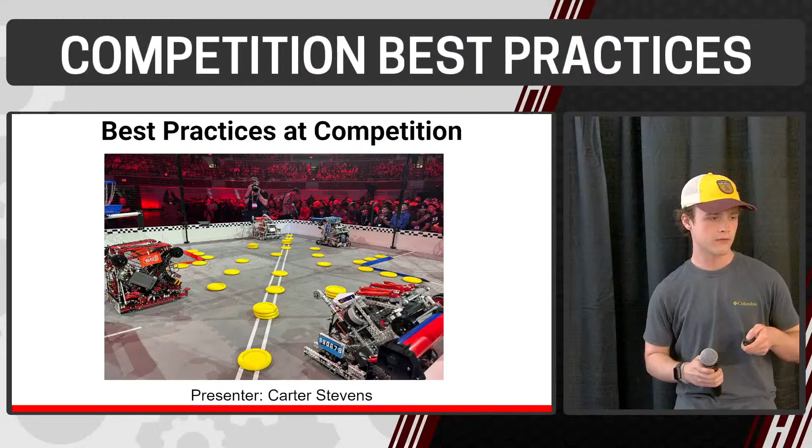Overall, how you should act at competitions, what you need to do, and just stuff like that. So let's go ahead and get into it.

So who am I? My name is Carter Stevens. I'm a former Vex competitor. I just graduated this year after Spin Up. I was on team 99067B from Change Up, which was the game in 2021, to Spin Up, which just ended this season. So some accomplishments I did in my Vex career.

We won our division at Worlds this year, which was pretty cool. It was nice to win a division finally, after unfortunately losing in round of 16 in Tipping Point, but that's besides the point. And then we won states 2 years in a row for Arizona, Tipping Point and Spin Up.

And I'm a freshman at Arizona State University, currently majoring in mechanical engineering, though I think aerospace is calling my name. Gonna switch soon, we'll see how that goes. And I pop back and forth in competitions, I help out, volunteer, and maybe this season you'll see me doing some judging stuff. But that's who I am.

So let's go ahead and start the competition best practices. Before we start, we're going to look at the agenda for this slideshow. We're going to talk about before the event, how you should act, what you need before the event, because it's crucial to ensure success at competitions. During the event, how you should approach certain teams, ask them about the robots, do some scouting, manage your time, match strategy. Then after the event, how you should try to network with other teams, get their Discord, and share resources to improve for future competitions, scouting, data collection, and using data for your pick list. And then we'll also be talking about some driving tips. So let's go ahead and start.

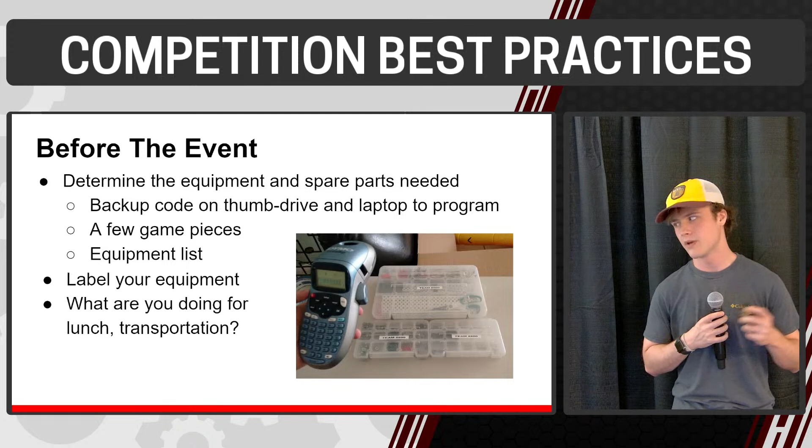And then lastly, another really important thing that I think a lot of teams undermine is lunch. You need to be properly energized during these competitions, or else you'll feel horrible. I remember the first competition for Spin Up at Mountain Point, I didn't eat anything the entire day. So when the elimination matches started, I was super fatigued, super tired, and we ended up losing because I just wasn't at my best performance. So you always need to make sure you know what you're doing for lunch and transportation there and back. Super important for competitions, it's something a lot of teams look over.

And also, you need to come up with hypothetical scenarios prior to the event of what you want to do or what could potentially go wrong. So for example, if you want to be ready for the worst, essentially, if your autonomouses don't work, you want to understand why you didn't achieve your goals at the event. So let's say you have a goal of ensuring that the autonomouses that you've coded work properly. You want to understand potentially why those autonomouses might not have worked at the competition, just so you aren't disappointed and wondering what's happening.

And you kind of want to minimize these errors at competitions because you don't want these autonomouses to not work, and then you're at the competition saying how could we have prevented this, because sometimes fields vary and stuff like that. So I guess at competitions you should really expect the worst, which sounds super bad, but if you expect the worst, you can kind of minimize error in that sense.

So now we're going to look at pits.

At most competitions, it's generally just a really small table that you can put all your stuff on. Make sure you have your essential parts there for maintenance and repairs. After matches, let's say a C channel gets bent on the back of your robot, you can easily find your stuff, which also goes back to labeling your parts, because if none of the parts are labeled, you won't know what's what, and you waste time potentially missing another match. Always have one dedicated person as the pit boss on your team.

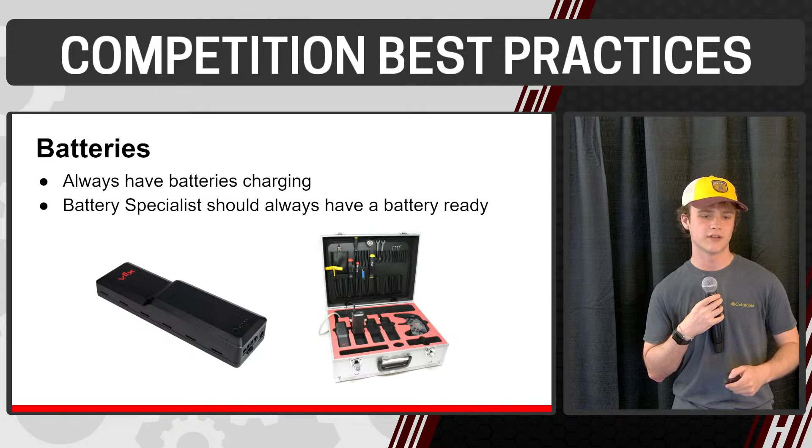Tournament roles. There's a lot of people on the team, so you always want to dish out your roles according to what they would like to do. So there's a mechanic, someone who's repairing the robot and builds it - make sure that if something goes wrong mechanically, you can fix that at the competition to make sure stuff works. The programmer, a scout, a strategist, a battery specialist, the person who carries the battery back and forth.

The pit boss, someone who's always at the pit. The driver, drive coach. So even though these are 8 roles, a lot of people will often have 2 or 3 of the roles. For example, the scout and the strategist will probably be the same person, and the driver needs someone to help them because sometimes you get so tunnel vision when driving, so you need someone to say 'hey, you need to do this' because you're not focusing on other people on the playing field. The pit boss and the battery specialist also might be the same person. So keep in mind, you don't need 8 people on the team to carry out each role - rather, people on the team will have multiple roles.

Okay, so now let's talk about before the match. Some tips: before every match, you should always talk to your alliance partner. You need to figure out who they are, what their robot is capable of, what their autonomous is, and see if they are capable of scoring or should be primarily a defensive robot. This is super important because if you design your robot for defense and your alliance partner is also a defensive robot, you don't want to go into the strategy of 'we'll both play defense,' because you'll just lose.

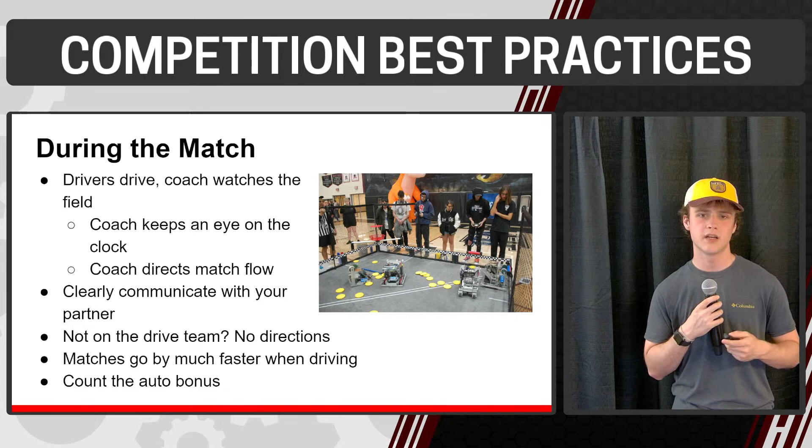Always make sure you know if you won auto, because this is super important. I know it happened at States this year in the finals match where a team looked like they'd won, but because of the autonomous period, especially in the spin up game, that 10 points makes a huge difference. So if you win the autonomous period, keep that in the back of your mind, even if it looks like you didn't win the match, because you never know.

After the match, make sure you yourself consciously look at the field and be like, okay, we scored X amount of points, we have this many discs in the high goal and such and such. Always confirm the score with the scorekeeper because sometimes as humans, we all mess up.

We all make little mistakes, so just keep in mind that the scorekeepers might mess up the score. Don't yell at them or anything, just confirm the score after you check it.

If there is a potential rule violation, have one person on the drive team go up to the head ref. Don't send the entire team. I'm sure it's super annoying for them to have 5 people come up and say, 'they did this, they did this, they did that.' Just have one person go up. It makes their life a whole lot easier, and it's just being a good person.

After the field is reset, the scores are final. Once that's done, it's done. You can't go back up to the head ref and say, 'wait, you didn't do this.' You should have told them before. The score is final.

I know in spin up this was a huge problem, but be ready to untangle your robot. Last year, all the string shooting was just total chaos. But even in other games, sometimes your robot might get wedged under a drivetrain or an intake. So be careful to make sure nothing breaks, and be ready to take another person's robot off yours if it's entangled by accident.

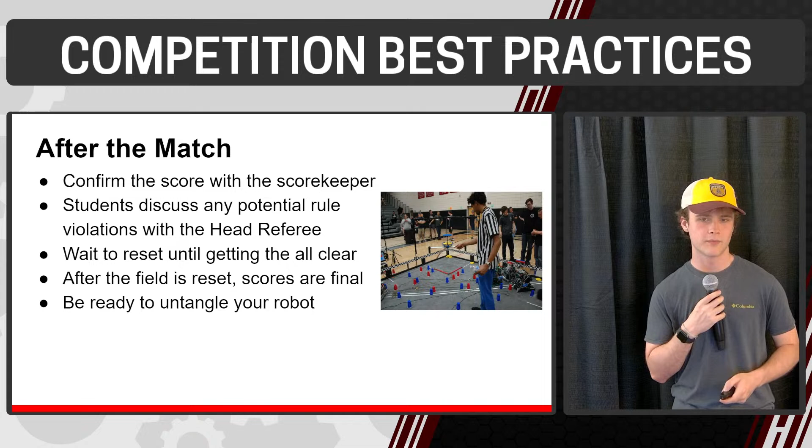Skills is super important. Don't make the mistake of waiting for the last 10 minutes of the competition to do your skills runs. Skills runs can qualify you for the state championship or even the world championship, depending on your score. Get your runs in early, don't do the thing of waiting. It's bad, you'll only get one in, and then you're gonna get yelled at. It's not fun.

Get your safe points first. If you know you have a high autonomous routine and you have a chance of potentially winning skills, make sure you run it first. Get those points in just in case, because other people's autonomous runs for skills might not work, or their driver skills might not be as good that day, and you could win skills just because you got it in early.

And if you do plan on doing a skills stop time, make sure you inform the scorekeeper or referee. Be like, hey, we're gonna plan on stopping at 10 seconds, just so they know. Don't be like, wait, stop mid run.

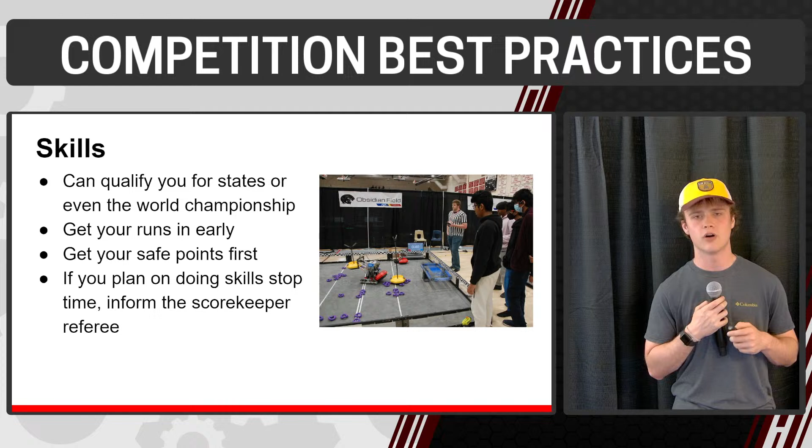It just makes their life a whole lot easier, so make sure you do skills. It's super important. I know there were some teams who didn't do skills. You can qualify for worlds from it, like if there's double qualification, so doing skills is a good backup just in case.

So scouting. This is super important at competitions, and even before competitions you can do this. Looking at a team's past competition results, seeing how many points they score and so forth, is a huge advantage, especially when it comes to alliance selection and match strategy. If you know what a team is capable of prior to actually talking to them, you have a better sense of how the match will play out, giving you a more direct line of strategy.

You can also walk around the pits, which is called pit scouting, to look at robots. Be like, okay, this robot looks pretty offensively capable, or this robot looks like it can do defense. Then there's match scouting, where we look at the team's points, OPR, DPR, contribution to winning matches, autonomous win points. That can be used to collect data on that robot's specific performance.

A smaller team means less rigorous scouting, because you just have to go up to one person and be like, hey, what does this robot do?

Another good resource for scouting is networking. If you know good teams prior to going to a competition, just because they're so well known, it gives you an upper hand of what to expect. You're not going to be totally shocked when there's one team who's just destroying everyone. So do pre-match scouting: look at the team list, see who you're going to face, and check how well they've done at previous competitions.

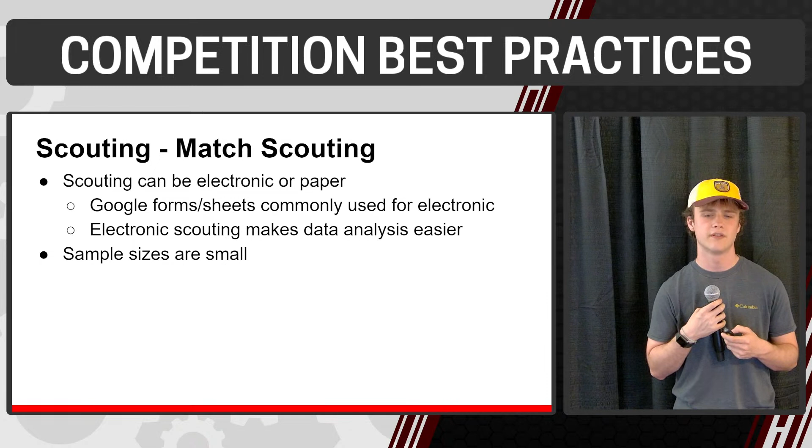But be aware that the sample sizes are small. Even if a team's looking good for 2 matches, that might not be the case for the rest of the tournament. Always be aware of what you're trying to accomplish, ask the team, and if you want to potentially alliance with them, watch all their matches, because it might be a fluke if they're only doing good for 2 games.

The scouting system is often created by the team strategist or scouter. Normally when you do pit scouting, we would have one or two people walk around the pits and ask teams about their robots, like hey, what does this do? Are you guys good at offense? What autonomous routines do you have? Can you guys play defense?

There should be one person always asking your alliance partners before every match, what can it do? Do you have an autonomous? What does your autonomous do? Can you get the autonomous win point? Stuff like that. But be sure to swap out your strategist and have other people do it, because it's good for that person to get a little break from scouting.

If you don't have that many people on your team, reduce the amount of teams you scout. Maybe make a list of teams who might be scary at the competition, seem really good, go up to them and talk to them about what their robot does, just to gather that crucial information on the teams who look good and could potentially win the tournament.

Data for match planning. The strategist should always give the data to the drive team, because that information will be crucial for the drive coach to look over, like this robot plays defense, this one's good at offense. It's really good for the scouter and the drive coach to have really good communication with each other.

In case you're like, who's this team? The drive coach might not know, and the strategist can say, oh, they can do this, they can score that many points, or they have this autonomous. It's really nice to know who you're going up against in detail before you're actually playing against them.

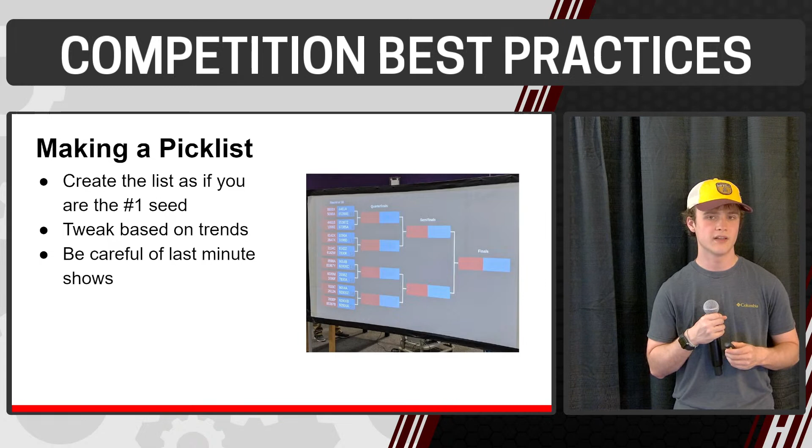You can always make a good case, like saying, hey, you're super good at offense, or we can play defense while you play offense. They might say, okay sure, we have seen you around, you are pretty good at defense, that would work.

Be sure to be super cautious when declining at competitions. Only decline if you know you can do better. Let's say, for example, you're the 5th seed and the 2nd seed picks you, but they're not that good, they're a push bot. They say, hey, we want to invite you. You should only decline if you know that the seeds from 6 on are significantly better than that 2nd seed.

You should only decline a pick if you know you can do better than what you're getting picked by, and you should take riskier picks if you know you're outgunned. So let's say you're the 16th seed and you're going to have to play against the 1st seed regardless. You need to pick a team that might have that inconsistency, like one match they're scoring all the points possible, but in other matches they're not doing that good. You might want to take that pick if you know you're really outgunned by a 1st seed, because that team might have a super good match and then you guys just beat the 1st seed because of that one really good match from the streaky team.

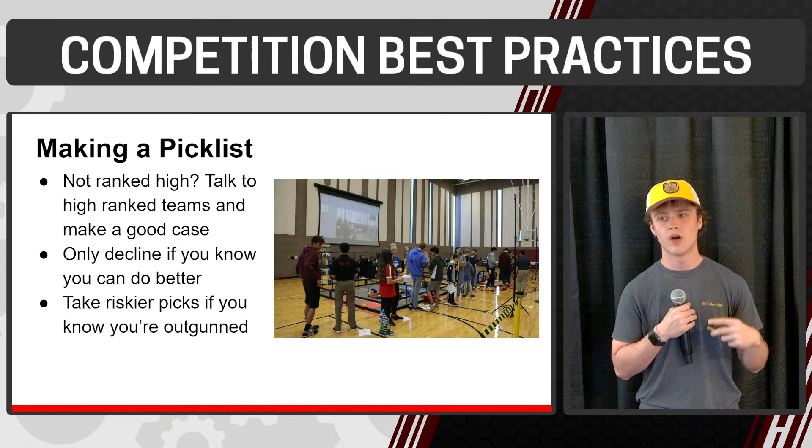For the 1st seeded alliance, Team A picked Team F. Team A has a true skill of 7 out of 10, while Team F has a true skill of 9 out of 10. So that alliance combined together has a true skill of 16 out of 20.

Let's see what else happens for this alliance selection. The 2nd seeded alliance has a true skill of 17 out of 20. So they're already better than that first seed just based off of Team B's pick of the 7th seed, which was probably the sleeper pick at this competition, and they probably got overlooked by the first seed just because of their seeding.

Then we have the third seeded alliance. This third seed didn't really make the best decision that they could have. They could have picked another team that was equally or just a little bit better than Team E, but that's okay.

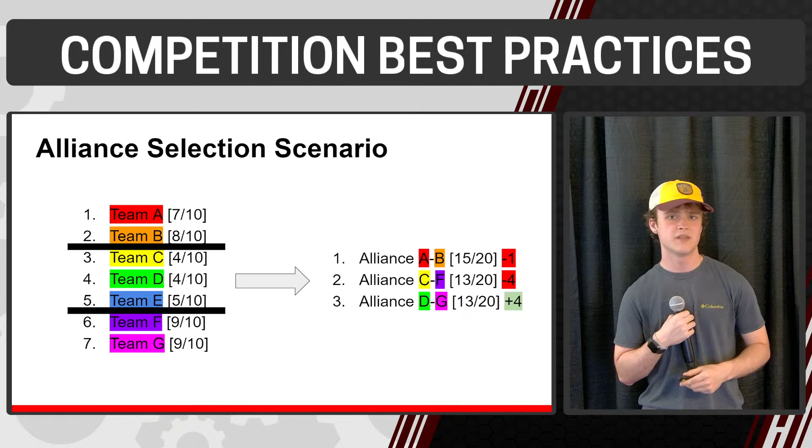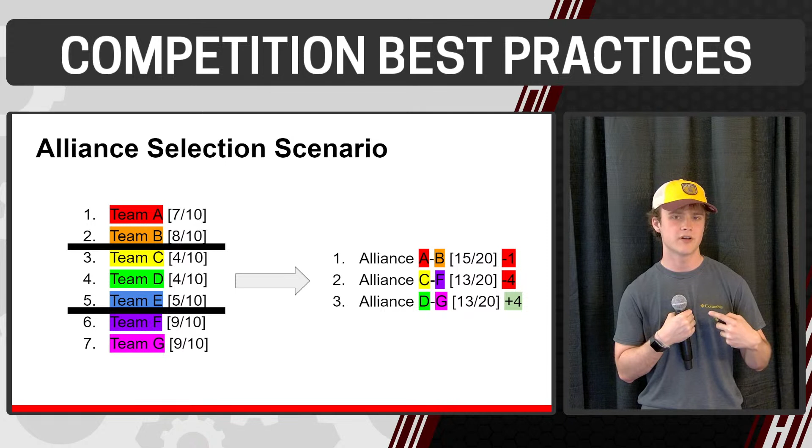When you're making a pick list, a team's performance cannot be easily summarized by one rating. You shouldn't just look at the OPR of a team, because it might not be that good at offense, but then on defense they're just insane and can shut down anyone.

There are also so many factors that one must balance during alliance selection. If the first seed picks a team, you need to understand that you can't pick them anymore, and so on. So having a list of teams that you want to pick as if you were the first seed is super important for alliance selection, because you never know what they're thinking and what could happen.

Always keep those factors in mind when you're going through alliance selection, and know that a team's performance can't really be based off of one rating. You have to take into account everything, their match schedule, how they've performed at previous competitions, and stuff like that. Because a really good team might have an impossible match schedule, but they're like the best team at the competition. Don't assume they're not good—they just had a really hard match schedule, causing them to lose a bunch of matches. Just be sure that a team's true skill isn't summarized by one specific rating.

So now the competition's done. Things went pretty well for your team. You're always going to want to reflect on what went right, what went wrong, what can we improve for future competitions. The engineering design process just starts over, and you have to reflect on what you did to improve for next time. Keep that in mind after competitions. Don't just be like, oh, we did terrible, we can't improve. You can always improve, especially if you break down what happened specifically, what went wrong in the matches you lost and what went right in the matches you did win.

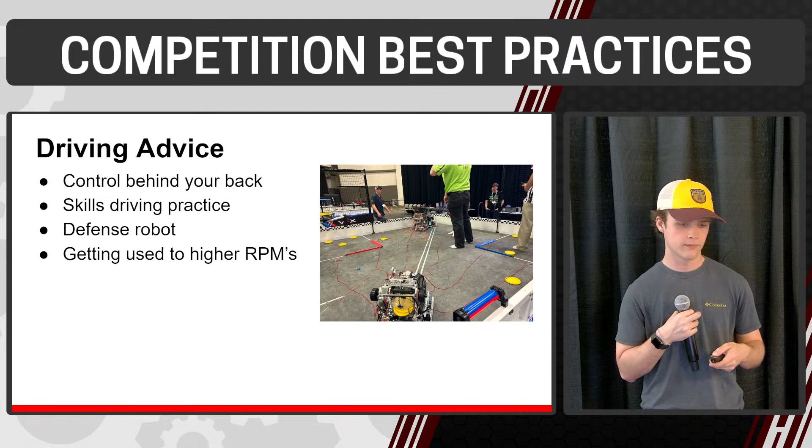So some other tournament advice: be flexible with the events, because sometimes you might get to a competition and fields might not be built, or the head ref isn't there, or stuff like that. Just be flexible. Understand that not all competitions are set up perfectly or run the same way. Just be understanding of school situations with fields and such.

Be sure to have fun. This is the best part about Vex. You should always try to have fun with competitions, even if you're losing. Make the best of a situation. It's hard, I know losing sucks, but you can always look at the positives and be like, how can we improve from here to get to the next level to where we aren't losing anymore and we're actually winning.

Another thing that's really fun is networking with other teams, because once you get to talk to those teams and become friends with them, they might share stuff with you. There's a lot of Discord groups, but be careful with some of them. You get involved in Discord communities, you can talk to teams on Discord and stuff like that.

Make sure you stay hydrated and stay fed. Don't do what happened to me at the first competition where you're super fatigued and tired. Drink a lot of water because you're doing a lot of walking back and forth and you need energy. Make sure you eat food and have a team brand. Go to a competition, if you're like the Jesters, wear fun outfits related to that. Have fun at competitions, basically.

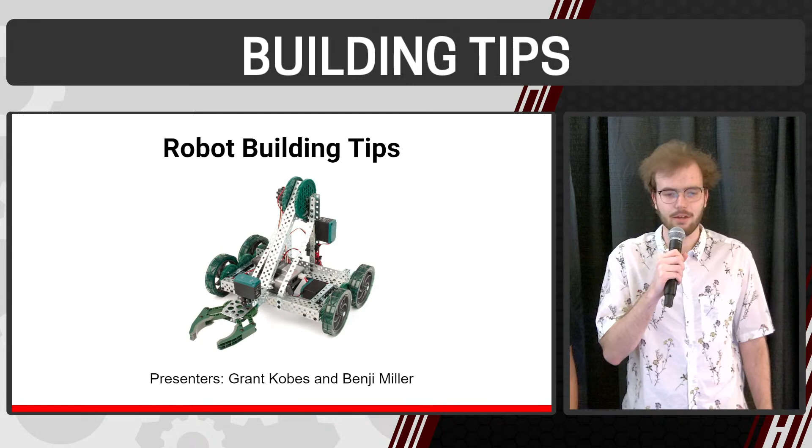So right now we're going to be going into our robot building tips, so you can build a robot that is as fine as the one you see on your screen right there, the original Vex Clawbot. I'm one of your presenters, Benji Miller, along with Grant Kobes.

So who am I? My name is Grant. I've been in Vex for 8 years as a competitor, and now this is actually my 10th year, 2 years as a mentor. I did 3 years on Team 8926 in South Carolina, and we won state all 3 years. Then I started a Vex U team, YNOT, at the University of Tennessee in Knoxville. In our final year, when I was team captain, we won both Worlds and the tournament championship, which was pretty cool. Now I'm a mentor for the YNOT Alliance organization, which is an organization of multiple different teams from all over the U.S. competing to hopefully win Worlds again.

And who am I? I'm the guy posing with that big stuffed shark right there. I'm Benji Miller. I did 4 years of VRC with Team 127, and I won 2 Arizona VRC state championships as tournament champion. My senior year, my team got third in our division at Worlds in 2018. Now I do a number of things like this workshop — I MC, referee, judge, coach a team — and I have a master's degree in mechanical engineering, so that's how I'm currently employed.

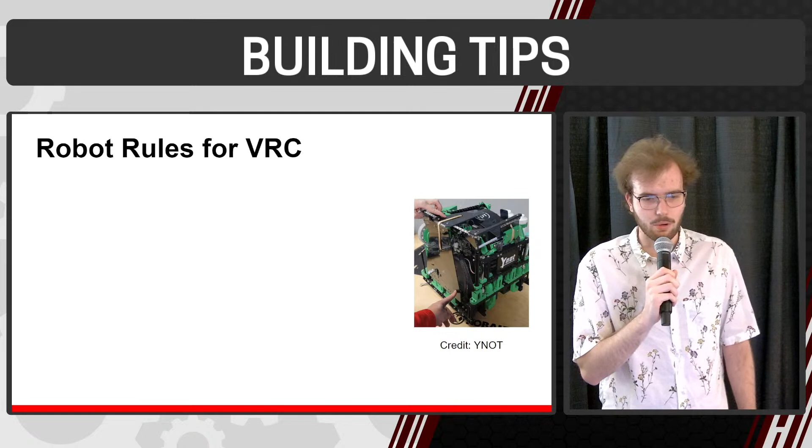So, Grant, you want to start with the robot rules for VRC? Yeah, let's get into rules.

First rule: you have to use V5 components. It's really the only option. There are a few other little things you can use, but you pretty much have to use stuff, especially electronics, that are V5. There's a size restriction in Vex — you have an 18 by 18 by 18 inch cube that you're allowed to use, and you have to start in that size. There is some expansion allowed in this game in pretty much every orientation, which is cool. Some years that's not allowed, but you have to start within that size restriction.

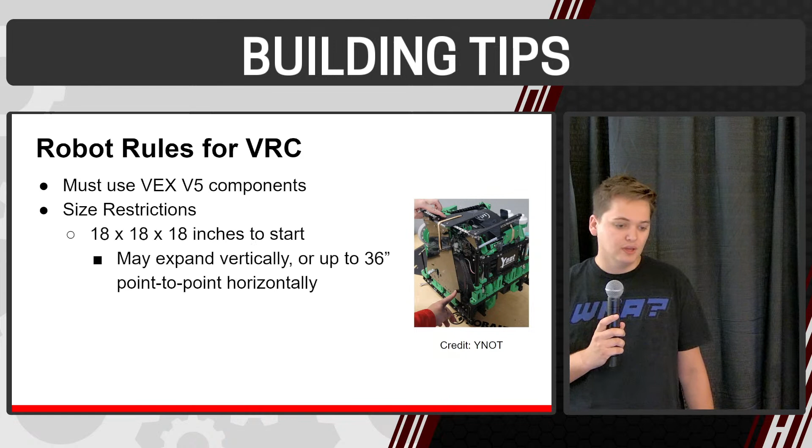Mechanisms can expand vertically. You have to use the V5 electronic system, which is the brain, up to 8 11-watt motors. This year we're getting into 5.5 watt motors, which are new — those only come in, I believe, 200 RPM, so they're a little different than the regular motors. We're now limited to an 88-watt system instead of the 8 by 11-watt motor system. You have to use a battery and a radio, and they all have to be purchased off the Vex website.

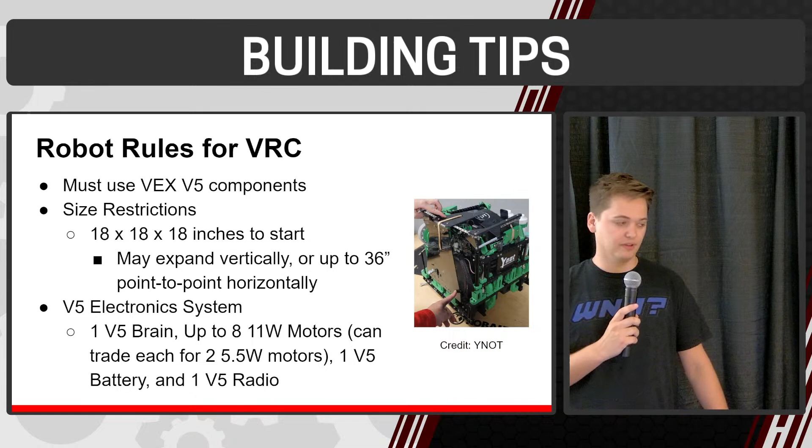18 by 18 — I wonder where I've heard that one before. So we're going to start off with the rules for pneumatics. We have a couple slides on this. This one is showing the old pneumatic system. They did recently release a new pneumatic system, so we'll get into that as well. But first of all, you're allowed up to 2 total pneumatic reservoirs, otherwise known as air tanks.

You're allowed 100 psi of pressure, so please don't try to break that rule, because with the new air gauge on the V5 system, if you're using that, you'll probably get caught right away. You're allowed as many cylinders as you want, but they must match the Vex part number. On the next slide, we'll get into the new pneumatic parts that show the different cylinders you can use. There's no motor penalty for using pneumatics, so if you can get your hands on them, as Grant might say, why not?

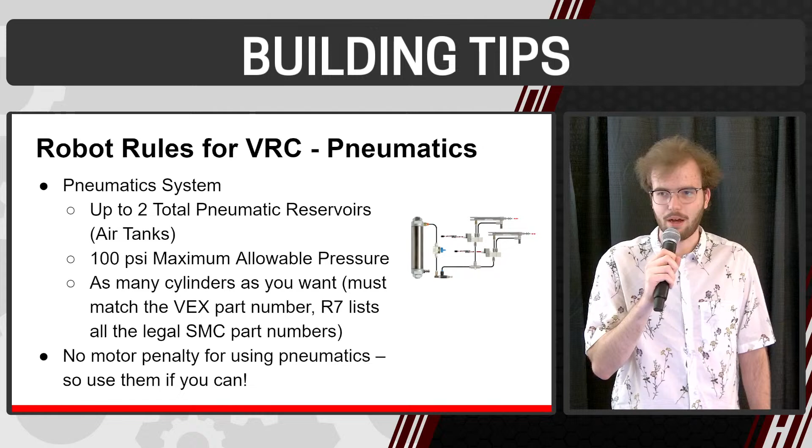So we're going to get into the pneumatics — very punny. They should be interchangeable with the old pneumatic system. Air is air, you see I have that nice O-ring there, because we're using the same diameter. We also have different stroke lengths of cylinders, so you might be thinking, what's the difference? First of all, obviously if it's smaller you can fit it more easily somewhere, but that's not the only difference — the total stroke distance is going to be a little bit different. Whereas before, if you wanted a shorter stroke you might just stop it earlier, now you can use a smaller cylinder and fit that in where you want.

Instead of messing with the stroke length and the effective motion you can get out of it with a gear ratio or some leverage, you can actually just use different cylinders. And of course, if you use a smaller cylinder, it's going to use less air. So if you don't need that full stroke, you can probably just get away with using that smaller cylinder. And like we mentioned, the PSI is limited, so you're going to run out of that a little slower.

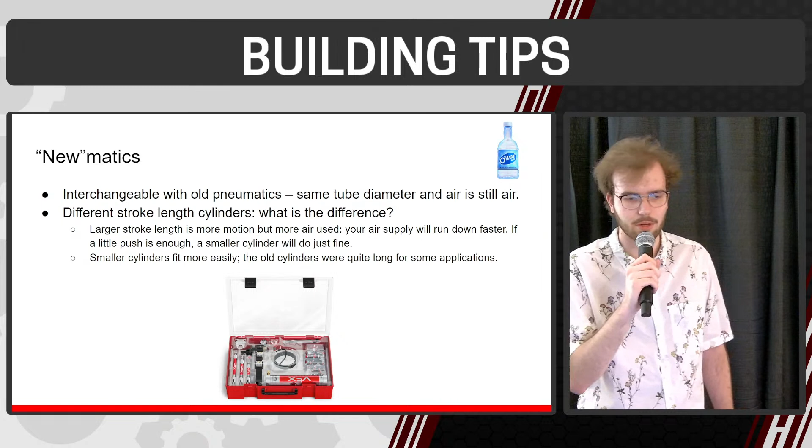Another fun rule you get to do is we get plastic. Plastic is any non-shatterable plastic, can be used to make different components of your robot. This allows for a lot more creativity in Vex, as the normal Vex system is designed off of these little half increment metal pieces. But instead, now with this, you can do a lot more custom stuff for your robot. However, you are limited to a single sheet of a 12 by 24 inch, which is about a 1/16 of an inch thick sheet. Doesn't matter what color it is. It can be like a tinted color, it can be clear, it doesn't really matter, as long as it's a non-shattering plastic. The rulebook actually specifies the types of plastic, but it's pretty much non-shattering. As you can see in these images, you can do a lot of cool stuff for this.

So you can make these little hooks that this team once did for the tower takeover year. We have a ball launcher on a catapult for—

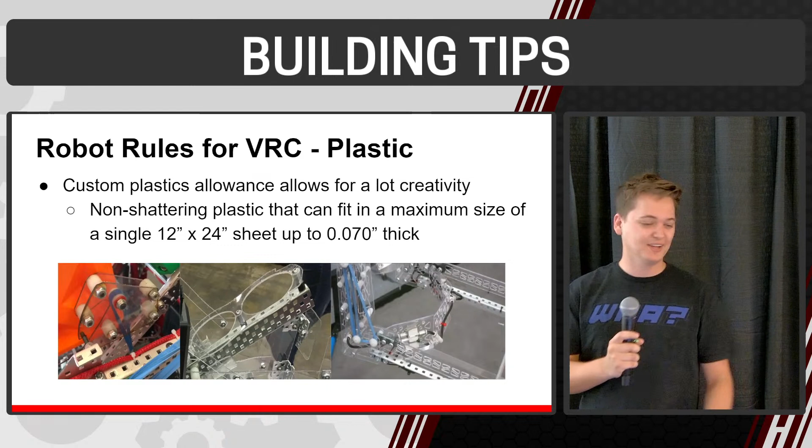What year was it? I don't know, I can't bail you out there, but you could use it this year. Yeah, you could use it this year. That was the flag year—I just can't remember what it's called. Turning point. Turning point, yes, there's turning point, lots of keywords and then points—turning point and tipping point as well. Turning point and tipping point. Did they go back to back on that? No, there was like a year of gap—separation. But then, still...

So another thing with this other picture is actually creating an entire structure piece for a reversible 4-bar, and then the actual single bar, all out of plastic, which was really cool. That was from Team 6007X, which I think now runs a really cool company.

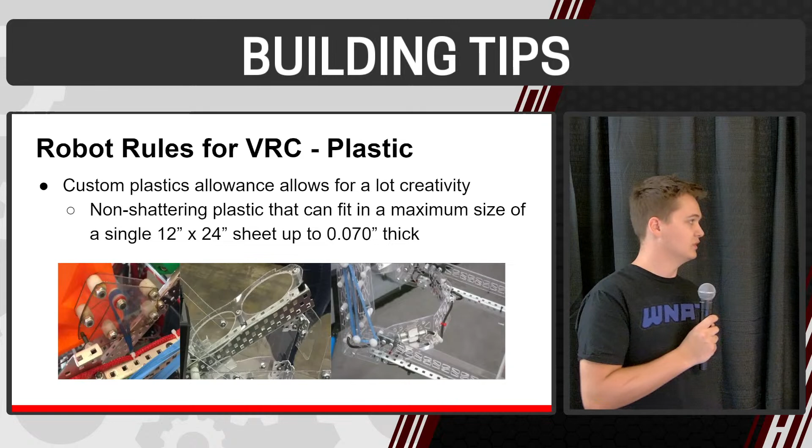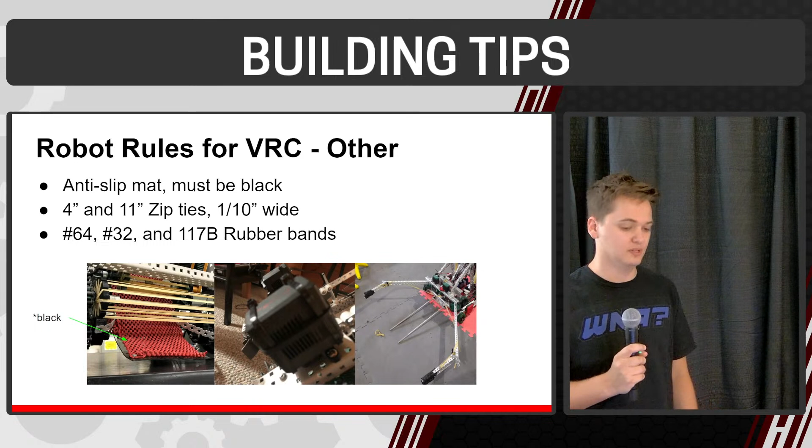Pretty smart people. So other robot rules that you get to do: you can use anti-slip mat. The Vex website has this, but you can use other types of anti-slip mat, that's okay. In this picture it's red, but it has now been specified that you have to use black. That didn't used to be written that way. You can use 4-inch and 11-inch zip ties. The width does matter, that's important—you can get called out on that. And then the only types of rubber bands you are legally allowed to use are 64, 32, and 117B rubber bands. I personally prefer 64s over everything else, but I know the new 117Bs that Vex sells are actually quite nice and pretty elastic.

All right, so we're going to talk about gear ratios and sprocket ratios. It works on a similar concept. So just to clarify, a gear is what you see on that screen here where you have the interlocking teeth. Don't try to do that with a sprocket, it's not going to work very well for you. So the sprocket, you're going to want to use that with chain.

So what's the difference between gears and sprockets? Well, first of all, the gear, obviously, has to be right up next to each other versus chain and sprocket—you can transfer that power over a longer distance. And then also with the chain and sprocket, both the driving and the driven end will be going in the same direction, versus the gears where they're going to be going in opposite directions.

But then the principle of ratio is going to work out the same. So you see on that top left image, you see motor and then moving part, or you could also look at that as driving and driven. So there's a 60-tooth gear there that's driving with that motor, and a 36-tooth gear that is driven. So for gear ratio, we're using this convention where it's driven over driving, 36 teeth over 60 teeth—it's a 3 to 5 gear ratio. What does that mean? That means this driven gear is actually going to do 5 revolutions for every 3 revolutions that this driving gear is going to do with that motor.

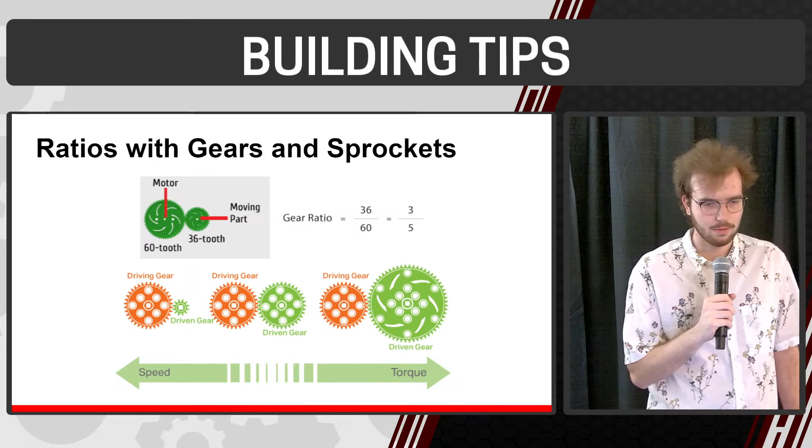All right, so we're going into structure. We're going to recommend that you use primarily aluminum, we'll say 99%. If you notice there's one small piece and there's no way you can really brace it better, and this one just keeps bending a little bit, okay, maybe you want to use steel there. I'm talking about, say you have a lifting arm to lift yourself up for the elevation in this game, and there's just one really critical piece, maybe that'll be steel. But if you're having robots ram into you and your robot is bending inward, maybe try to brace that another way as opposed to just saying we're going to make our whole drive base steel, because that's going to slow you down a lot.

So again, if you're looking to start a team and you're ordering parts right now, I would say stay away from the steel. Just order all aluminum. Obviously, it's a little more expensive, so there's cost benefit, but for the purpose of being as competitive as possible, aluminum's your way to go.

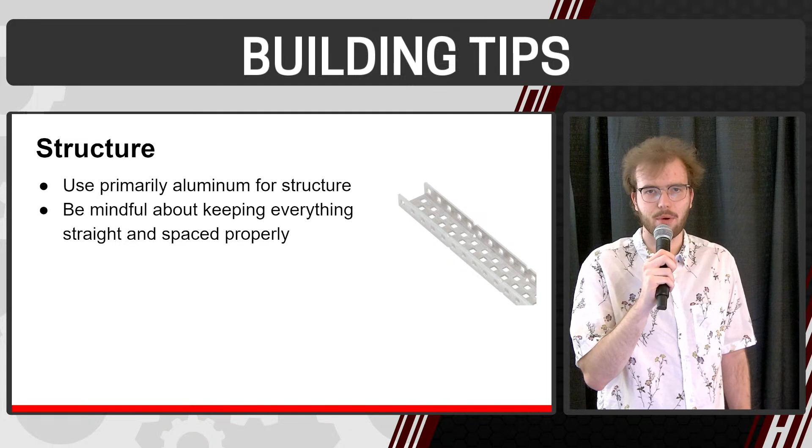And then make sure you're keeping everything straight and making sure you're keeping it spaced properly. Because if things aren't aligning, say your drive isn't lining up, that is going to cause you a lot of issues with your drive burning out, making things not free spin as easily. Make sure you can free spin your wheels and your drive when the motor isn't attached. They should free spin easily, that kind of thing.

And you notice there are square holes, and you're putting a round peg in a square hole, right? And there is a little bit of tolerance, a little bit of wiggle room, because you're relying on essentially your bolts to be tightened enough to have what we call in the industry preload on those fasteners. It basically sandwiches two pieces of metal together when you're putting a bolt between them. And if that preload is overcome, everything's going to shift slightly, until it reaches the point where it's putting what we call shear stress on the bolt. Basically, one part of the metal is pushing the bolt one way, one part's pushing it the other, and then unless the nut comes off the bolt or something like that, that's going to limit how far it can go.

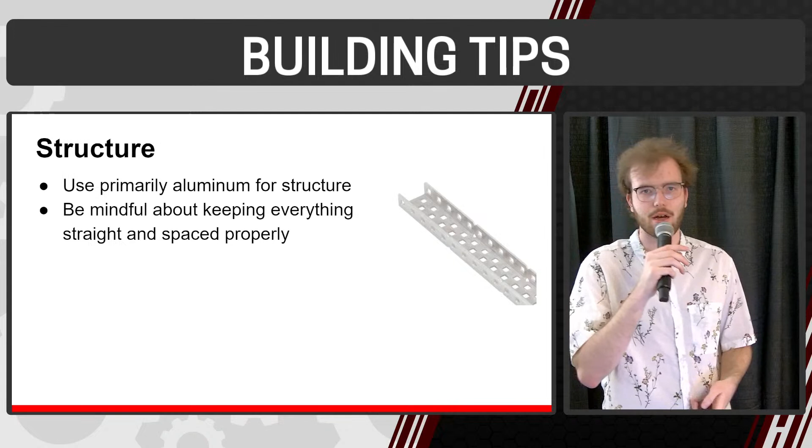By that point, it'll already be a little bit misaligned. So just bear that in mind, and try to have mounting points or multiple connection points between two pieces of metal or two overall substructures as far away as possible. Because if you move a fraction of an inch over here versus moving a fraction of an inch relative to each other right here, that's going to be a lot more change in angle when they're close together. So try to space out your structural joints.

And then, like I mentioned, Vex metal square holes create slop. And then a small low torque hand drill is going to speed up your assembly process. That'll allow you to iterate your robot design a lot more quickly. So if you're able to afford that, make sure that you consider that.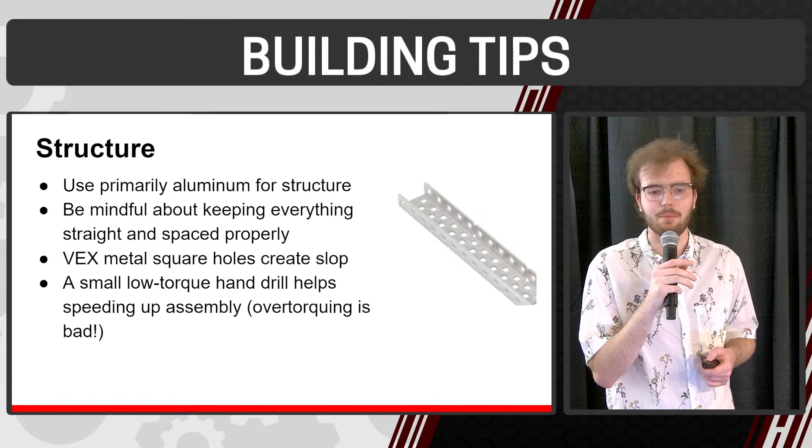But don't over torque it. You want to limit your torque when you do that, so you don't strip the head of the bolt, because that is very, very, very unpleasant. I think most teams that have been in robotics for a while have been there, and sometimes you're like, man, can I just cut my robot in half because I just need to get this bolt off?

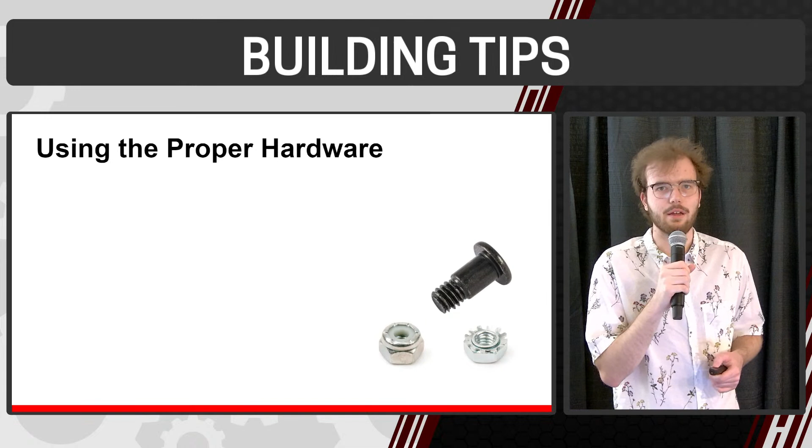And then we'll speak to using the proper hardware, talking about nuts and bolts. You see that black bolt on the top and then two nuts right there. Nylock or Kep's nut? It's an age-old question in Vex. So we're going to recommend that you use Kep's nuts sparingly, and we're going to use them in combination with Nylocks.

There's a bit of a tendency with Vex teams that they say, oh, you know what, we'll just use Kep's nuts, we'll put on Nylocks later. And later comes and you haven't done it yet, and part of your robot falls off in the middle of the match. So if you think you're gonna maybe be using that part later, I would just tighten it down with a Nylock. But definitely, if it's gonna be your competition robot, I would say all Nylocks. Kep's nut is only like, oh, I'm gonna throw this thing on real quick just to test it, and this isn't gonna be the final form or anything like that.

But overall, we're just like with aluminum and steel, Nylock is the aluminum of this debate. And then, here, let's go back for a little bit.

Okay, another thing about bolts is, if you're gonna use Nylock, please make sure that the bolt is actually long enough to get into the nylon portion of the nut. I've seen this actually quite frequently, where teams will use a bolt that's too short or sometimes even too long. Too long is not a huge problem, other than it may stop you from building in other areas later down the line, and then you'll have to replace it with a shorter bolt.

So just always try to measure what size bolt you actually need, as Vex makes tons of different types of bolts, and there's tons of different options. And you don't want to be putting extra weight on your robot that you don't need, but you also don't want to be putting a bolt on there that's not gonna do anything when it gets to the actual locking portion of the nut, and then your robot just falls apart. So be very careful about your bolt lengths.

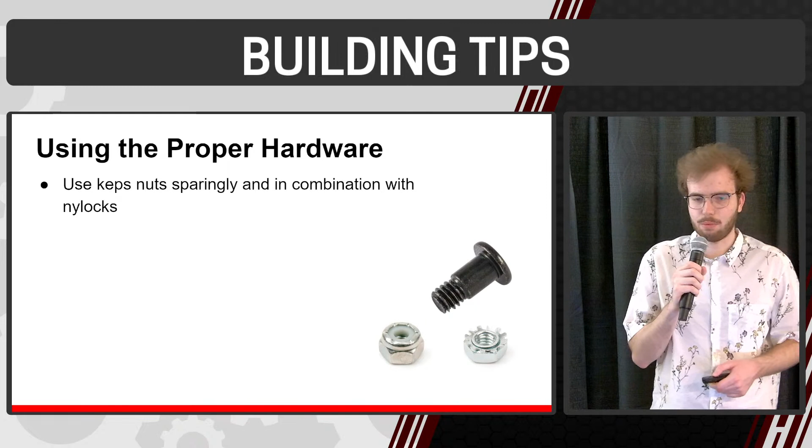Yeah, exactly. So you see in that picture of the Nylock right there, you can see the white nylon portion at the top, and that's what Grant's talking about. So make sure the bolt gets to there because that's what provides your locking feature. All right, great point, Grant.

And then I'll hand it over to Grant for our section on motion. All right, so we got a lot to talk about in motion, but just to get started, so drive shafts, they're these little square shafts that you're going to have that fit into almost all the Vex products pretty nicely, honestly. But there's two types. There's the regular drive shaft, which is now called low strength, and there's the high strength. The high strength ones are pretty beefy. They're quite strong, but they're not very easy to use on most of the robot.

You normally have to actually drill a hole in your C channels in order to use them, which is kind of a pain in the butt. But in some cases, you do need them. But most of the time, you're going to be using a regular drive shaft or a low strength drive shaft. And these drive shafts are all going to need bearings.

If you're a new team, please use bearings. If your robot is making clicking noises or crunching sounds, check your bearings. Bearings are very important to motion, as a square hole does not make a good turny thing.

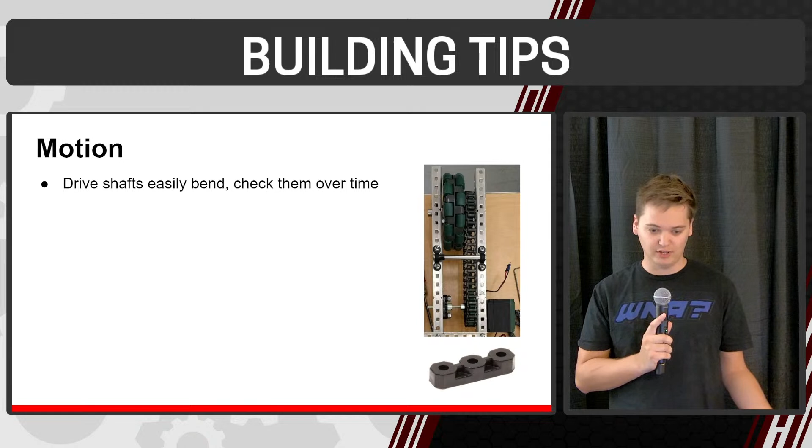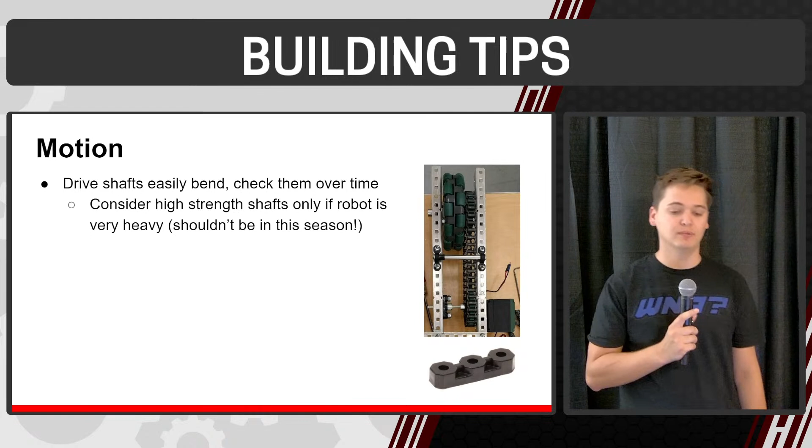You need a round hole to make a good turn. High strength shafts aren't a huge deal this season. They can make stuff more robust, but honestly they can be used better in actual structural ways than in rotary ways. Check for friction.

What I like to do when I put my robot together is spin all the wheels freely without the motors connected, to see if one spins for 6 seconds and another spins for only 2 seconds. The one that spins for 2 seconds might have unnecessary friction that isn't good for the robot. We want all our drive shafts spinning the same way, so when we put the robot on the ground and make it go forward for the first time, it doesn't actually go left.

So always check for friction and alignment. Please use the bearings, they're quite important. Try to use the 2-support rule of thumb: have 2 bearings, one on one side, one on the other.

For these types of bearings, you have 3 holes, as you can see. You can use the first hole or the third hole to actually do the shaft portion of the bearing, while the other 2 hold it in place. I personally prefer that you use the center hole for most things. You don't have to, but normally it supports it a lot better and has less tendency to shift, especially in drivetrains. So be cautious about that.

You can see in this picture the motor goes to a sprocket that has a chain on it, and in the center there's the bearing. There's probably another bearing you can't see that's inside the C channel, but keep in mind, bearings are quite important, I can't stress that enough.

Reduce the number of external gears and sprockets when possible. I did this once: I built a robot that had a chain of sprockets with, I think, 9 different transfers of motion, which introduces what we call slop.

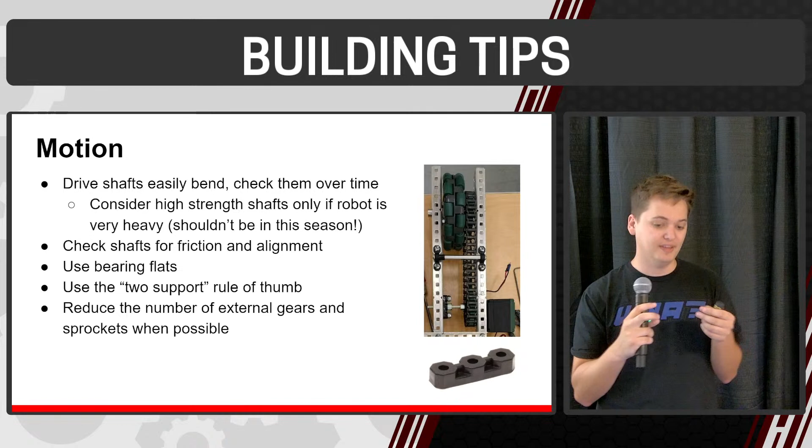All this stuff fits together pretty well, but not perfectly. To make the system easy to assemble, Vex has built in a little bit of tolerance everywhere. So the more gears you stack on top of each other, the more tolerance you end up having. I got it to the point where on my robot I could spin the wheel almost a half turn in either direction before the motor would actually get engaged, which is awful. You don't want to do that.

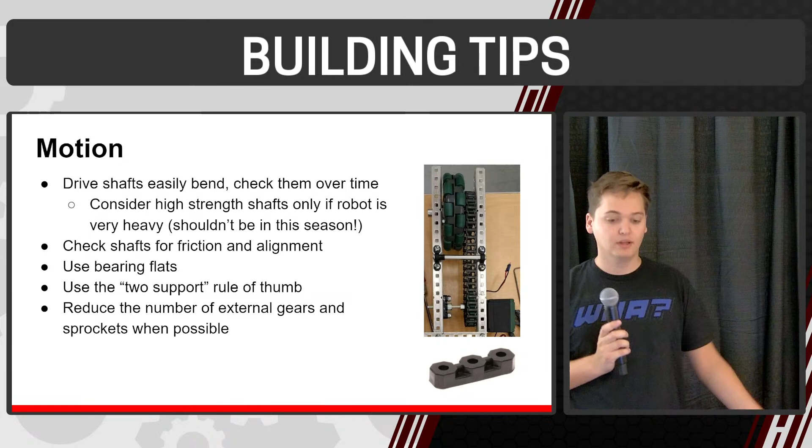So try to think about ways you can reduce external gears and use the internal gears on the motors when possible. Obviously that's not always the case, and you can't always do that, but try to generally use as few external gears as possible.

Now we're going to get into different types of systems. First, drive systems. Basic VRC drives: there are 4 main ones - the tank drive, the H drive, the mecanum drive, and the X drive. Most teams are honestly going to use the tank drive.

The H drive is basically a bit of an expansion on that, giving the ability to strafe. With an omni wheel, you can turn really easily, but also slide sideways if a force pushes you sideways. On this H drive, instead of 4 wheels there's a 5th wheel in the center, and that wheel pushes you side to side, which is pretty cool.

The mecanum drive and the X drive are also capable of strafing, so actually the tank drive is the only one that can't. In some cases that strafing can be really helpful, in this case maybe not, depending on the game. In this game, our field is relatively compact, so strafing could be useful, but there's also going to be a lot of fighting in this game. So once again, the tank drive may reign supreme, as it normally always does.

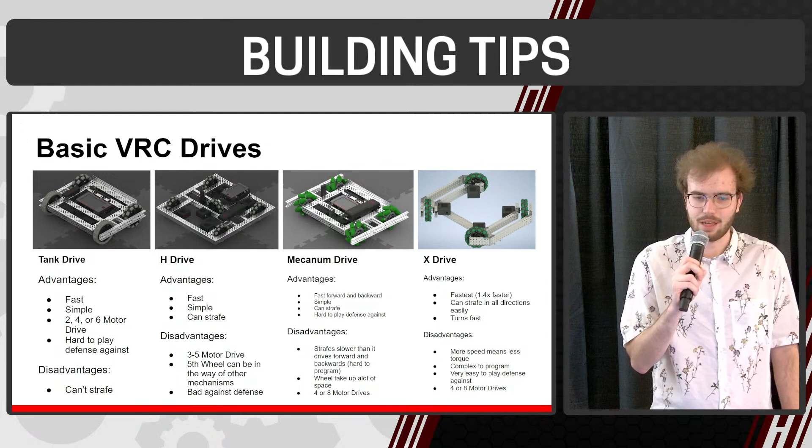Also remember when you're testing that you're not just going to have a drive. If you're testing whether you can get over the bump with an X-drive, put like a 10-15 pound weight on it to make sure it can actually get over with that, not just the weight of the drive alone, because the drive is probably only 2-3 pounds. It's not going to be the same as your whole robot once you build it up. Especially once you make the robot taller and add stuff to it, your robot may actually tip once it hits those bumps.

Some teams are going for going over the bump, some teams are trying not to go over the bump and instead limit themselves under that 12-inch bar, which we can get into in a second. But just some general disadvantages and advantages of each drive.

The tank drive is the simplest robot design. It's fast, it's simple, it's very easy to increment on motors, and it's relatively hard to play defense on because it's got all that torque from the way it's built, direct force.

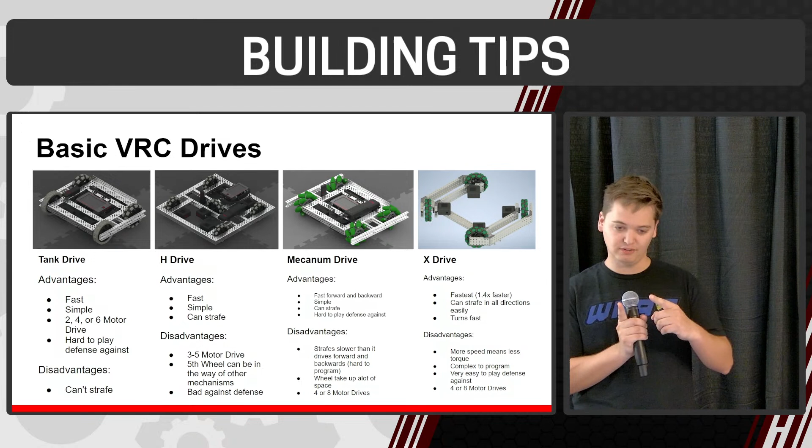The H-drive can be pushed in all directions. I can't lock out a side to be pushed on like I could on a tank drive, because I need to be able to strafe in all directions. The Mecanum drive is similar, with that ability to strafe, but it's harder to push because the rollers are tilted at a 45-degree angle, which is pretty cool. But the problem is its strafing motion is not in sync with its forward motion.

For programming, it's actually relatively complicated because let's say I want to go a foot forward, I only need 100 ticks to do that. But to go the same distance, 1 foot to the left, I need 160 ticks. It's not always that way, and the friction - this is a very friction-based drive - changes per field. So in my opinion they're quite difficult to program without external sensors designed to account for those directions.

And then the X-drive is pretty cool. It's actually the fastest because of the way the wheels are set up, but by having that more speed, it loses a lot of torque and can be pushed very easily. This is the easiest drive by far to play defense against, but it has the most unique way of driving - it can very easily move and strafe in all directions with relative ease, but because it's so maneuverable, it can also be pushed in any direction.

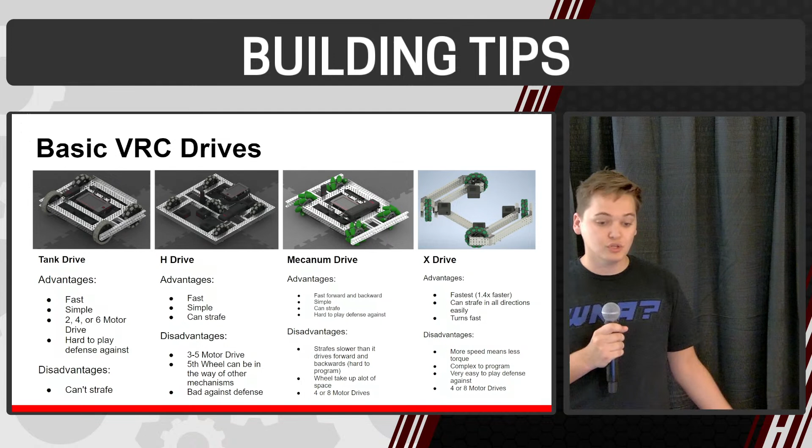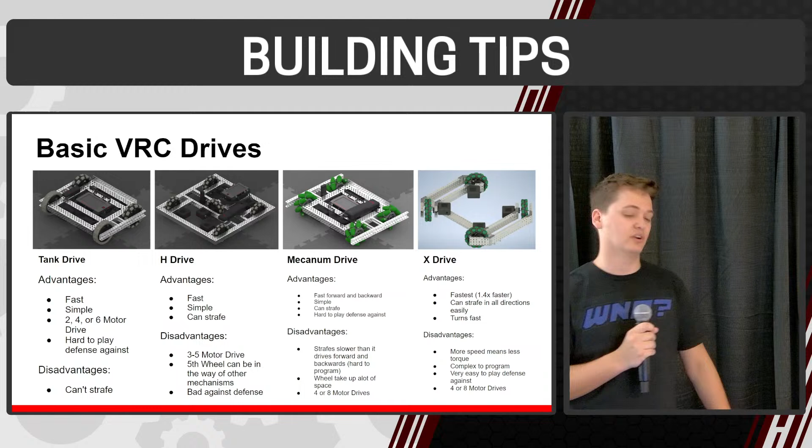So those are the basic drives. Personally, my favorite, and pretty much the only one I've ever used, is the tank drive. I've built one of each for every competition throughout my career and been to an event with it, but I almost always default to the tank drive because I just think it's simple and easy to use. Now, getting to lifts.

This year, lifts aren't super important, but you may be interested in them just because it's something cool to talk about. For this year we also have an elevation portion, so you may consider designing a simple lift to help you get lifted. A 4-bar is the simplest one - it's 2 bars on one side, and then on the other side of the robot you have another 2 bars.

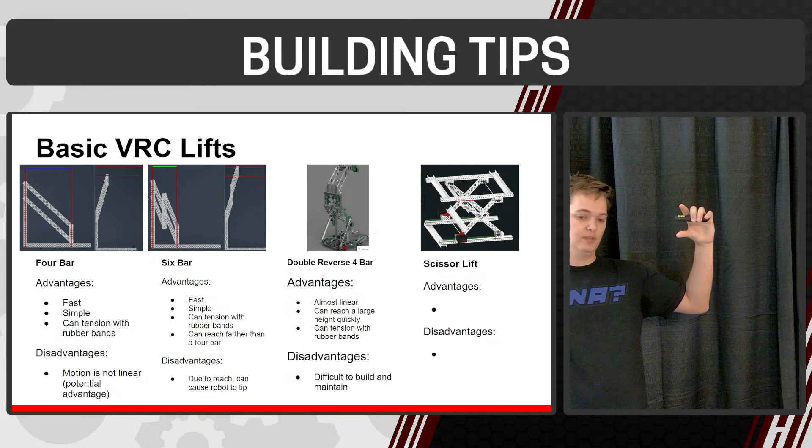You have an equal space of a bar between them. And when you go up and down, that bar on the end stays parallel with the rest of the robot. It's pretty simple, very easy to use. You can tension it, but the motion is not linear. So it's going to go up and down, but the actual thing, when it goes up, is going to start moving in this way, towards the robot.

A 6 bar has a little bit more reach. It can go a little higher, but it can cause it to tip if you go too high. It's basically the 4 bar, but just longer. So if you need a longer robot, 6 bar is pretty cool.

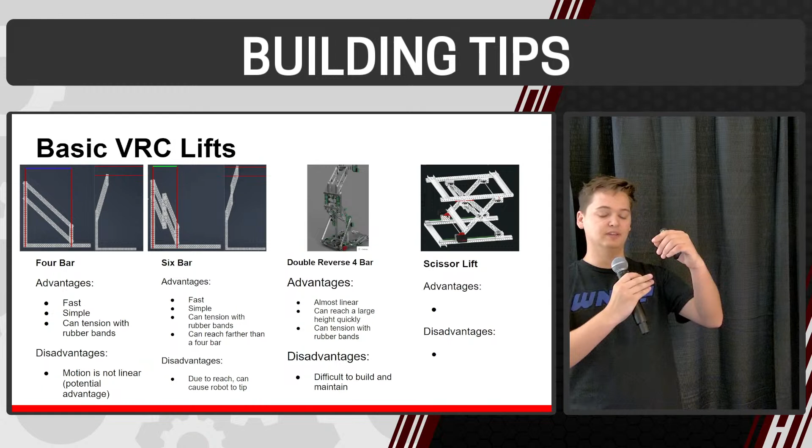Double reverse 4 bar is actually famous for coming from Vex, from the Vex competition, and now it's gotten into FIRST a little bit as well. But double reverse 4 bar is basically just 2 four bars, one going forward and one going backward. If you use them together, you can cancel out that non-linear side-to-side motion. So now, one's expanding, the other one's expanding, and it actually keeps that center bar just going up.

Really tall, they're pretty cool. They're hard to build because you have to have these two lifts basically stay together all the time. They need to be in sync with each other. There's a lot more moving parts because there's 2 of these things instead of 1 happening. So they get more complicated. They have more time that you need to maintain them. But they're honestly pretty awesome.

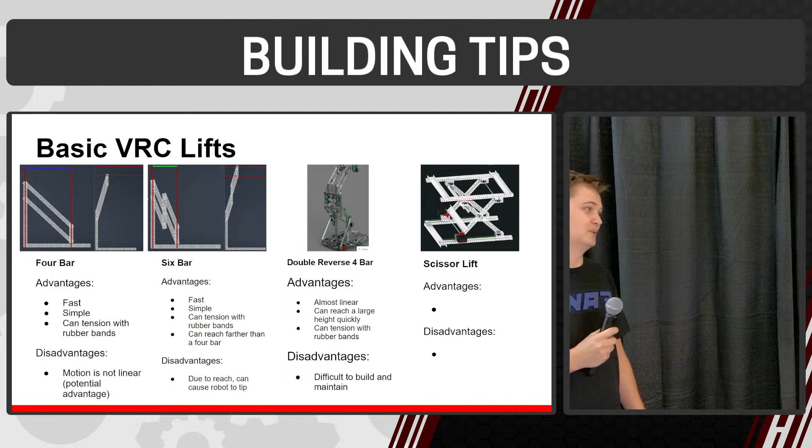And then lastly is the scissor lift, relatively uncommon. So, advantages, it's pretty cool and it does move linearly. Disadvantages, they're huge, very clunky, with a ton of moving parts. They're difficult to maintain, but they do look cool. Yeah, lots of friction, but it looks really cool. So, weigh it, but I don't know if this is the year for the scissor lift. Probably not. Probably not any of these lifts. But definitely not the scissor lift.

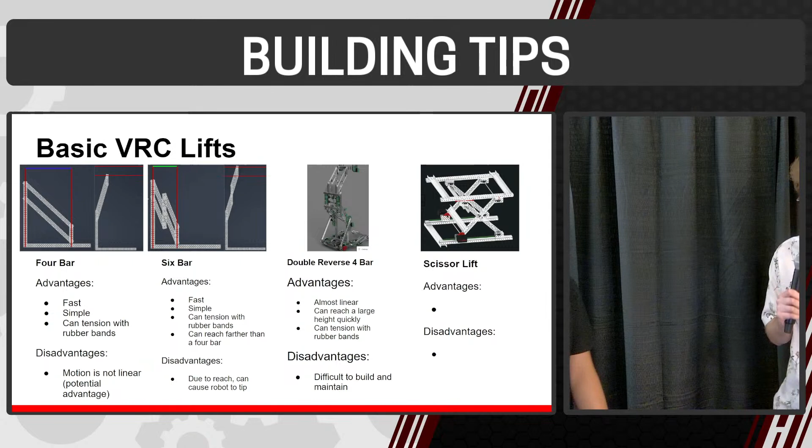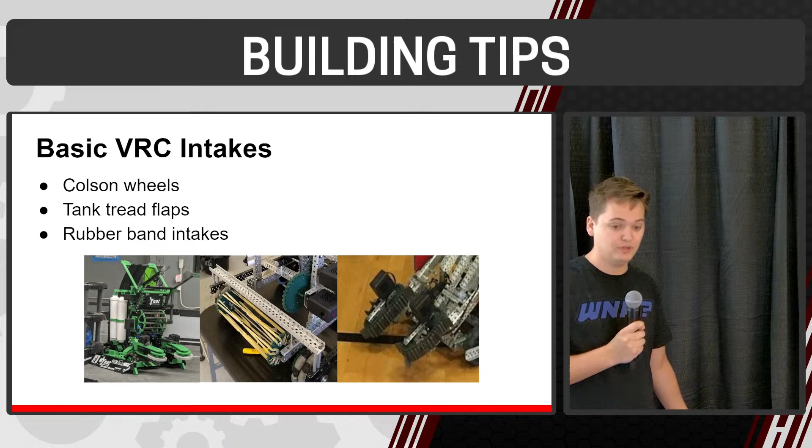All right, so intakes. This is pretty needed in this game, very important to control wheels. So there's the Colson wheel style intake, going on the slides from left to right. Colson wheels are just squishy rubber wheels that we use to intake an object into the center of the robot. We have 2 on each side, and they suck the thing inside.

Tank tread is all the way on the right. Tank treads just have some grip on them. Basically, they're just tank treads with rubber on them, and those spin to allow a similar concept to the wheel, but you can actually make it linear instead of just being a round object.

And then lastly is rubber band intakes, which have actually proven so far to be pretty good this season. It's basically 2 sprockets that you string rubber bands between, kind of like a combine looking thing. But when the ball, or in this case the tri-ball, touches it, the rubber bands deform around it but still grip it. That gives it a lot more compliance than a lot of these other intakes, and you can make them super wide. So you can do a lot. You have a big reach area, and since we only need to control 1 ball at a time, you just have a super wide intake, grab one, and keep going.

One thing I'll mention about those rubber band rollers: if you have collars holding those sprockets, they're essentially being pulled together by all these rubber bands. If you have collars on those axles, make sure you get them really, really tight. Probably not using the set screw — you can use a full-size screw there to make sure you get that cranked down really well, or even just fill it with a bunch of spacers in between. Just total spam of spacers in between, and then unless the laws of physics stop working, those spacers aren't going to phase through each other and allow them to collapse.

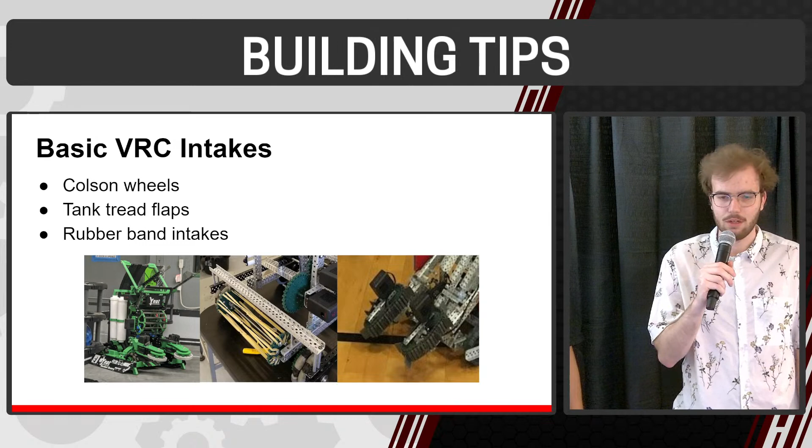So just be careful about that one, just one note. Yeah, this is definitely a harder one to build because you've got to keep the rubber bands from collapsing on themselves. Another thing you can do is add standoffs between the two things. So the shaft in the middle is still there, but you have standoffs keeping the 2 sprockets apart before you put the rubber bands on. Like spacers, this might actually be something where high-strength shafts would be nice to use, because their spacers are a little bit more hefty. But just be careful — there are a lot of YouTube videos on how to build rubber band intakes out there.

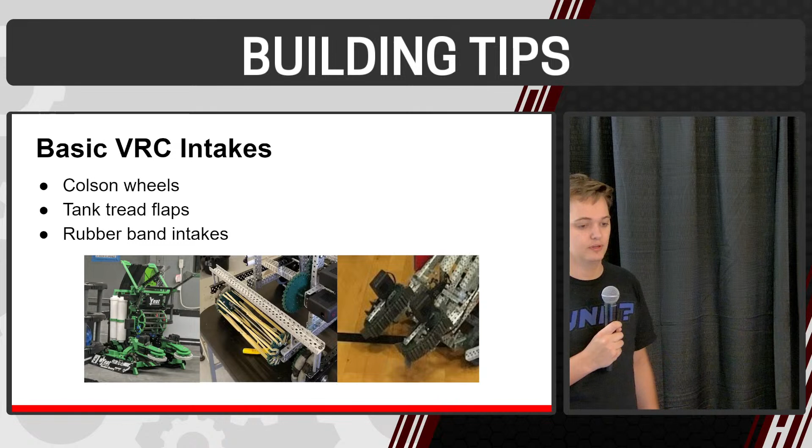All right, so robot robustness. As they may tell you in the manual, VRC is an interactive game every season, so be prepared to take hits from the defense. This means, think of how fast your awesome robot is—another awesome robot's going to be going that same speed, and they're going to run into you.

Be ready for that. So if you're cringing every time your robot runs into a wall or another robot runs into yours, you probably don't have confidence in your build quality. Either it's a psychological thing, or maybe you need to improve your build quality a bit, just to the point where you feel comfortable. It's not BattleBots, but you should be ready to take an impact from a 20-pound object going at, I don't know, 5 feet per second.

And then make sure you have a firm grip on the game pieces. This year isn't really a year where you're holding a lot of them, but make sure that if you do take a hit and a game object flies out, that's not a big deal. Make sure it doesn't fly out and get stuck somewhere critical in your robot that could incapacitate one of your subsystems.

Make sure you reinforce problem areas. We'll get to that later, but if something goes wrong in practice, make sure you fix it—I don't mean just repair it on the spot, I mean fix the actual root cause. Make sure that whatever deformed, you didn't just replace it; you rebuild your robot so that it can't happen again.

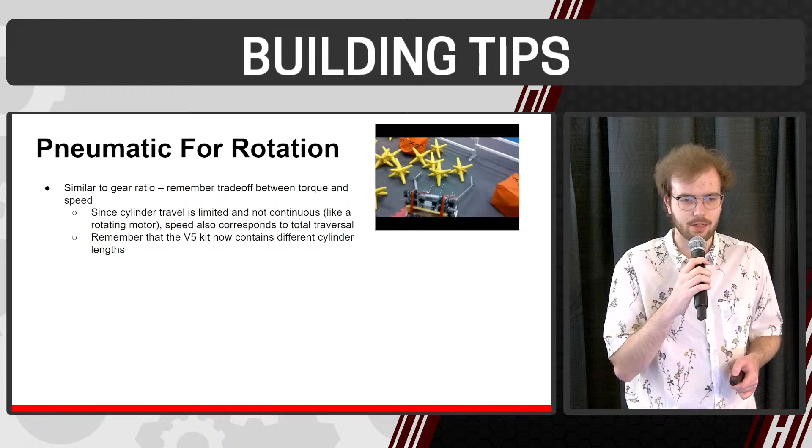And then we'll look at pneumatics for rotation. Is this going to play the video? Yes, it is—oh, it's a little small. But the point is, look at that: that's a pneumatic claw, but it's rotating. How is it doing that?

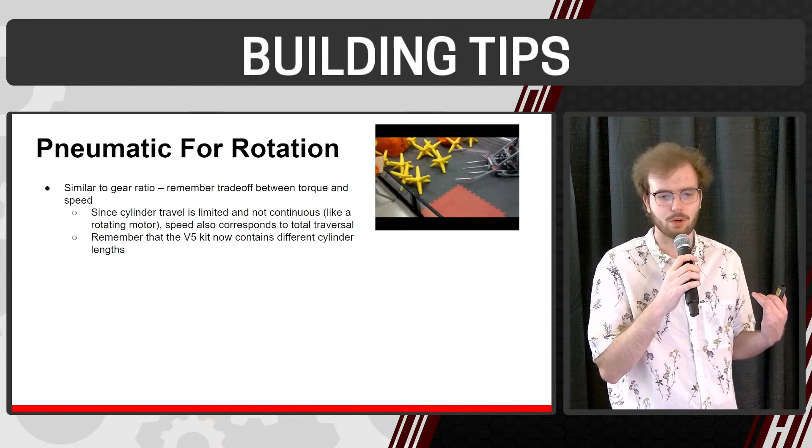Basically you just pull or push on something that's on a rotational joint, and it'll rotate. It's a similar concept to gear ratio, where the farther away from the joint you push something, the more torque you have, but the less speed it moves—and in this case, the less distance it moves, since your overall driving distance is limited. With a motor, you can continuously turn 6 times to get something to rotate once, but with a pneumatic, since you're only moving a set distance, the ratio of the distance for those cylinders determines how far that thing actually rotates.

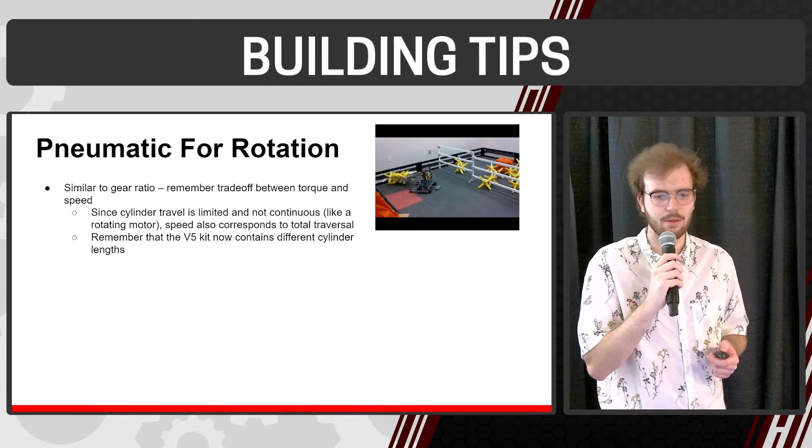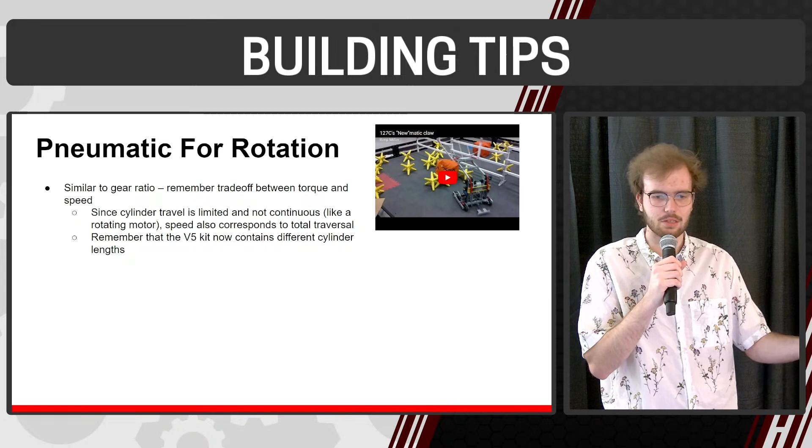Also bear in mind that the V5 kit now contains different cylinder lengths. So if you want something to move a shorter distance, it doesn't mean you have to put it farther out and have it go slightly slower, although the pneumatics are still pretty fast no matter your ratio. You could just use a shorter cylinder, or maybe a longer cylinder because you want something to move faster—but putting the driving point closer to the rotational joint isn't going to work if you require more torque.

All right, so we're going to talk about one of the most important things. Actually, these are all pretty important, but this is one of the things that takes a decent team into being a really good or a great team. So if you think that maybe describes you, definitely pay close attention for this.

So we're going to talk about designing for controllability, because it's one thing to look at that robot you saw online and say, I'm going to build that, and you build one that's 90% as good, and you're gonna make it even better. But if your robot's not controllable, you're not gonna have very good results in the competition. And it's not just that your driver's bad, maybe the driver needs the programmer to work with them and make things easier to control.

So first, we'll talk about tolerating error. The best robots work under non-ideal scenarios. So if you're doing an initial test on your intake and you put this tri-ball perfectly in front of the robot, and drive forward, and it picks it up, okay that's a great starting point. But what you really want to look at for tolerating error is how it works if it's off to the side.

3 inches to the left, 3 inches to the right? You don't want your driver to have to narrow in on 1 inch, looking across the field needing to line it up within a 1 inch tolerance. You want them to be okay within 6 inches of the perfect location and still able to pick up this tri ball. You don't want them to have to do surgery remotely from across the field.

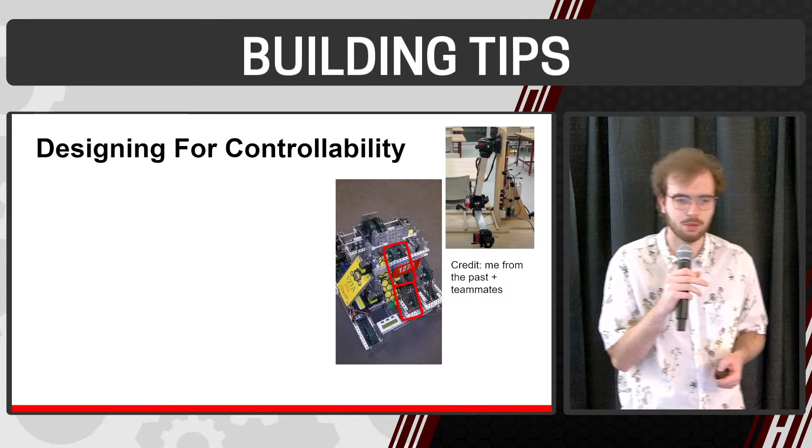When you're making the robot controllable, this depends on your team's programming capabilities, but the mechanical features we discussed are going to help you out as well. Keep things as simple as possible in your robot build, and that'll help out your programmer a lot. Your programmer doesn't have to be amazing for you to be consistent in your programming skills and your autonomous, if you just build things in a way that makes it easy for the robot to pick things up without having all the precision.

And then you notice here I have the 2 red boxes around there. That's a 2-stage intake. Not that you'd probably want a 2-stage intake this season if you're only getting one object. But that allows, for instance, in that season Nothing But Net, you'd be able to continuously pick up more objects with that first stage of the intake, whereas the second intake stage is controlled separately. So when you're intaking objects, you're not also running the top part of the intake, which is going to shoot them off into the flywheel.

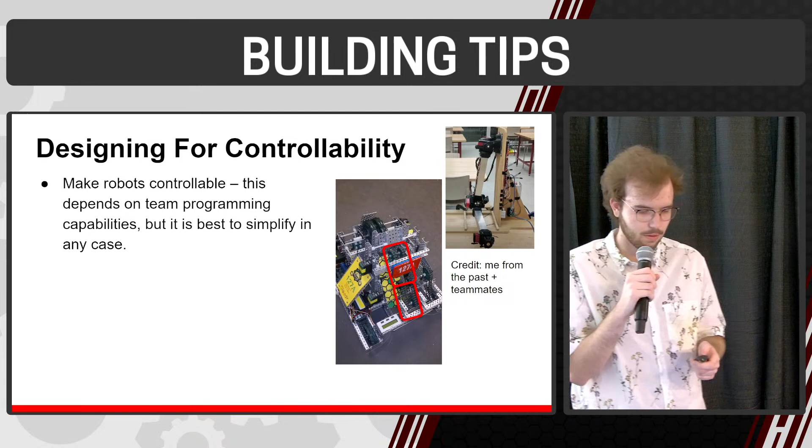Stuff like that. And then, like I mentioned, multiple degree of freedom robotic arms are pretty odd this season, but you would want to consider things like how you're controlling your launcher, that kind of thing.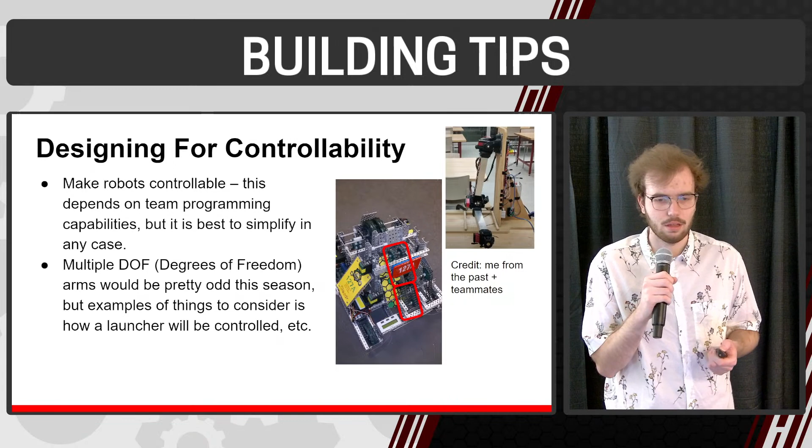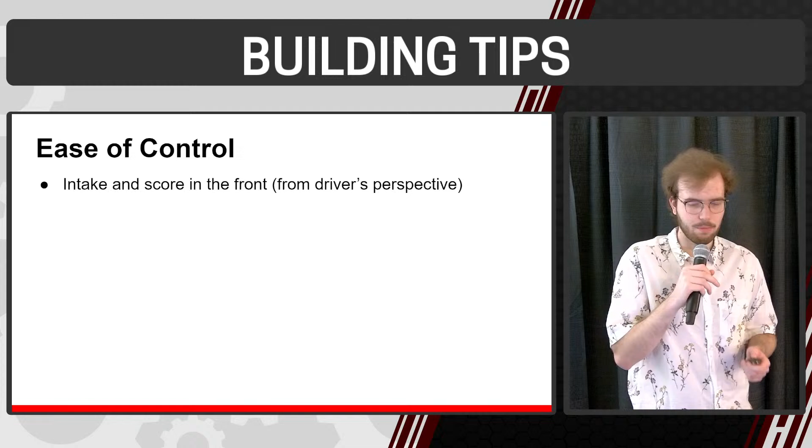Okay, so ease of control. I would recommend whatever direction you consider your driver, whoever considers to be the front of the robot, you can change that - it's up to your programming - but I would recommend that you intake and score on the front side always. It's the most natural for the brain.

And then I think the biggest time waster that we see with inexperienced teams, like I mentioned, you're spending 15 seconds chasing that tri ball down around the field. It's kind of hard to watch sometimes, I'm not going to lie. So make sure you're working on acquiring those game pieces quickly - that's going to be one of the biggest determiners of how good your team is. So touch-take intake mechanisms, that's usually an active one. Sometimes you can do that.

You can still build in room for error with other intakes, with claws, that kind of thing. But as much as possible, you should be able to pick up game objects on accident. If there's a tri-ball and you didn't see it, it should go into your robot and get taken in, right? It should be that easy. You just need to drive your robot to the right spot, and have as large an area as possible for collecting those game pieces.

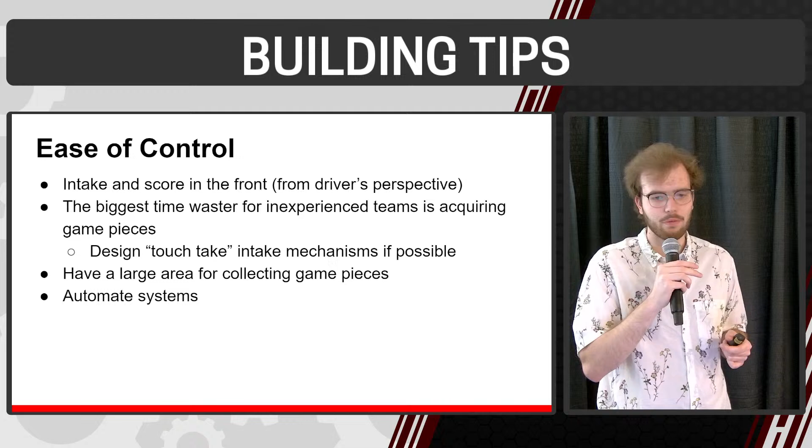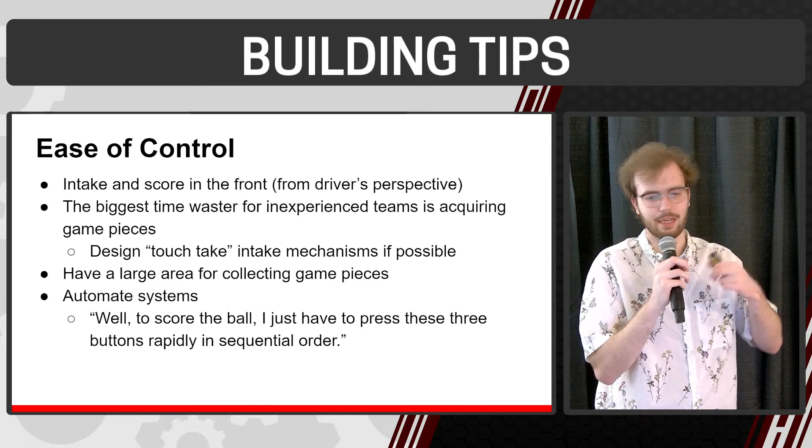Automate systems as much as possible. We'll get into that, what some people call macros. Instead of saying, okay, I need to press this button to move this motor, this button to move this motor, do all these things in sequence - hey, if you're doing the same thing in sequence, that sounds like something a robot could be programmed to do, right? That's what we have code for. If you say, to score this ball I just have to press these 3 buttons in rapid sequential order, and maybe there's a timing element as well, maybe you just make that one button a macro.

And then, most important tip: don't practice until you get it right, practice until you can't get it wrong. What does this mean? Make sure you're aiming for 99% plus consistency in your practice, closer to 100% if it's anything that could end your match.

Like, oh, our robot tipped. Oh, that's fine, we'll just put it back up and keep practicing. No, you need to make sure if there's any way you can build your robot at all, change it around so that you can't tip. Any programming controls maybe you could do to prevent that. The last thing you want to do is tip at the beginning of your match, and then you're just sitting there having the worst Vex Robotics experience of your life as the match plays out around you and your partner gets 1v2'd hopelessly.

And the driver practice isn't just about the driver. So look for issues with the robot performance. This is why driver practice is so important, because usually, say I'm shooting hoops, I'm practicing that, that's like working on your driver skill, right? But the nice thing about Vex is you can get so much better with practice, because what if someone's augmenting my arm to never get tired at the same time, right? You're working on improving multiple different aspects - you can work on your programming, your driving, and the build quality of your robot all at the same time.

And things will never be nearly as clear to you as when you finally get to do some practice and you see how things work. And then, like I mentioned, if your robot messes up and breaks, if it tips, you don't get to fix that in the middle of a match. It's going to be a really uncomfortable minute and a half as you watch the match play out. So make sure you fix that in practice. I mean, I've been there - things come up, they really do, where you've thought, well this never happened in practice. But if it does happen in practice, that's your opportunity. That's a good thing.

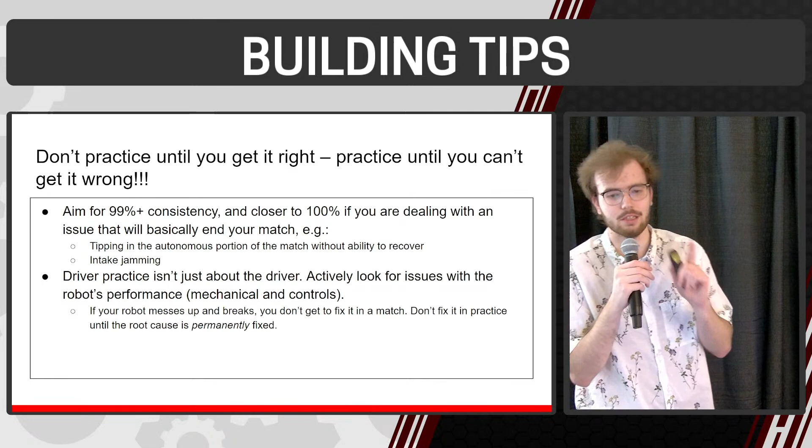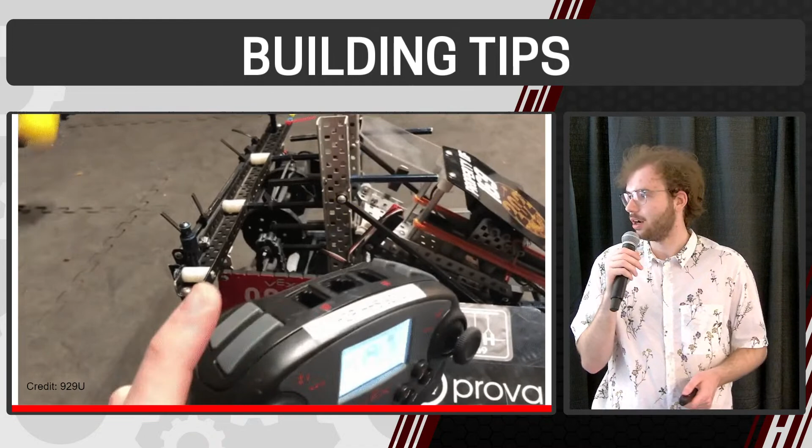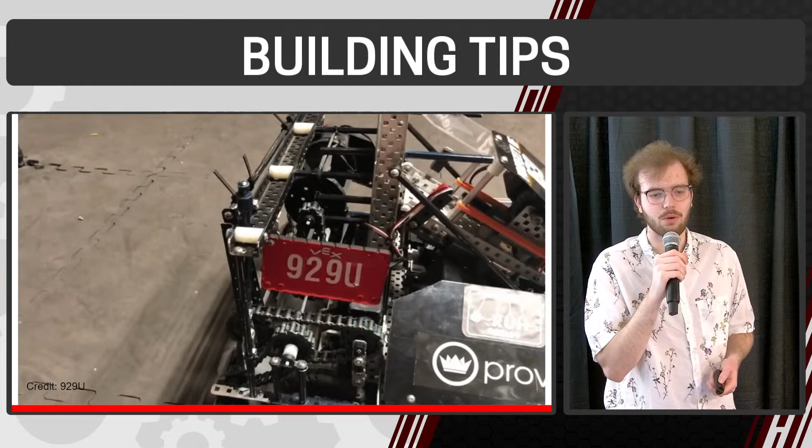And here's what we were talking about with controllability earlier. This is an example of a macro in Turning Point - we figured out the name of that game, great job. So they have a macro here: they shoot one high, boom, and then they angle their shooting puncher mechanism, whatever you want to call it, and then shoot one low. So the driver is just demonstrating he's only pressed one button there, and he's shooting both those balls exactly where he wants. All he has to do is line up with 2 balls and then press a button, and the robot does the rest. That's so much faster, so much more consistent than the team who has to press a button to fire, then press a button to angle the shooter and hope to get the right angle, then press a button to intake, then press a button to shoot again. That's going to take forever, and it's probably not going to be as consistent.

Woohoo! It's game time, baby. It's game time. Da-da-da-da, da-da-da-da.

Okay, so VRC Over Under tips. I just wanted to start out with this quote: 'Whatever you are, try to be a good one.' Because maybe it's just because it's early in the season, but I really feel like there's a lot of different things you could do this season. I want to speak to that a little bit, Grant, or we'll get to that later - any big ideas? Okay, anyway, we got that.

We got that coming up. Don't worry.

There are a lot of interesting and good robot styles bouncing around. You can throw balls in a number of ways, shoot balls across the field in a number of ways. You can say, I want to do a short robot that goes under and also can traverse this bump. Or you can say, I just need to traverse the bump, or I just need to go under. And then you can say, okay, I want to hang high, or I want to hang low because it's not worth hanging high. So there's a lot of different robot designs that are good, but get that practice in and make sure you really dial in your robot, whatever it is.

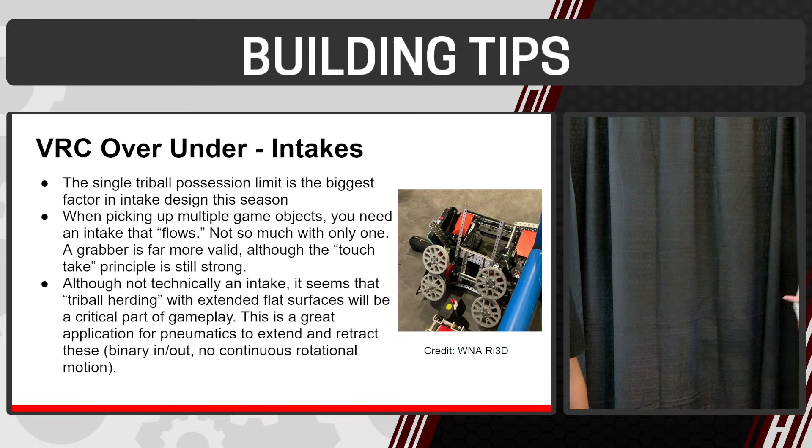All right, so intakes. Intakes. There's a lot of different ways to do intakes.

I know earlier we were talking about possibly using the rubber band roller style. It's been pretty good at being able to pick up stuff in front of you, especially in the match loading area if you need to pick something up away.

So this robot is actually a WNA robot from the Robot in 3 Days that we did. It's 4 teams, actually it was about 7 teams that all came together that used to be on our alliance, and they all created their own robots, mixed the teams up. 4 different robots were built, 4 completely different styles.

And this one was actually the best. This is the tournament winner that we had.

This robot was built to pick up the balls in the center as quickly as possible from the front, and then in the back of the robot you can see the little U-shaped thing that actually threw the ball across the field. So not only could it take the intakes to push the ball under, but it could also throw the balls from the other side of the field.

Since we're only allowed to use 1 ball, focus on that, right? We're not trying to pick up 4 balls at one time. We're designing our system to only control 1 ball.

You're going to need an intake that flows. Not so much only with 1, but a grabber is more valid, though the touch take principle is still really strong. Just being able to get to a ball, grab it, and get rid of it is going to be pretty helpful this year, especially since we're going to start seeing a lot of these balls get thrown all over the place. Although it's not technically an intake, it seems that this herding is going to be pretty cool.

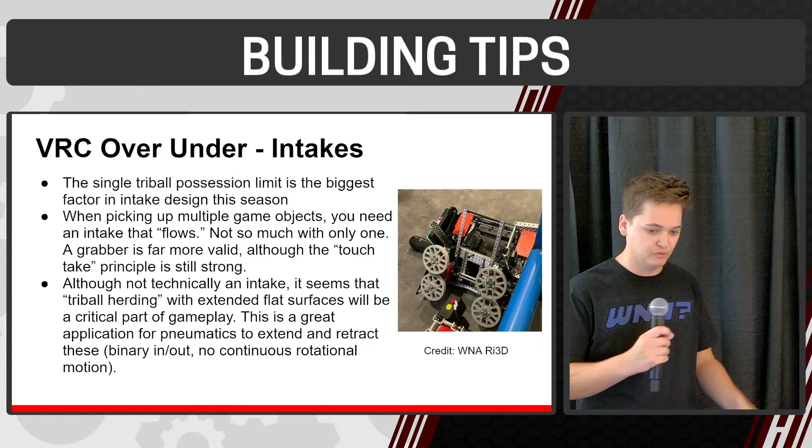And those have been really successful, not only shoving in as many tri-balls in the last few seconds as possible, but also using them to try to pull balls out later in the match.

All right, so I'm going to talk a little bit about launchers. When you're designing a launcher, you kind of want to think, well, what is my purpose, right? If you do decide to do a launcher - because it's not a given that you do - the primary purpose is to try to throw tri-balls to the other side of the field.

But then secondarily, there are some teams that are trying to also put them into the goal. And so that's not going to be quite as consistent, although I think it is fairly consistent to have an accurate shot from set locations, say match loads, especially for programming skills or driver skills. I've seen that a lot.

And so you're going to be punching them specifically right up against the goal, and then that can pair with some of that tri-ball herding that Grant talked about to shove them in. So I think that was one of the highest skill scores that I saw. Maybe still the highest, I'd have to check on that. It's still the highest - he knows which one I'm talking about.

Basically you have to think, what is my objective? And when you're thinking what is my objective, well, you might think, how are people going to try to counter this, right? So if you're throwing, tossing, shooting, whatever you want to call it, with a really low trajectory, that might be very blockable. Versus if you do a really high shot, it'll be virtually impossible to block. So that's another thing to think about.

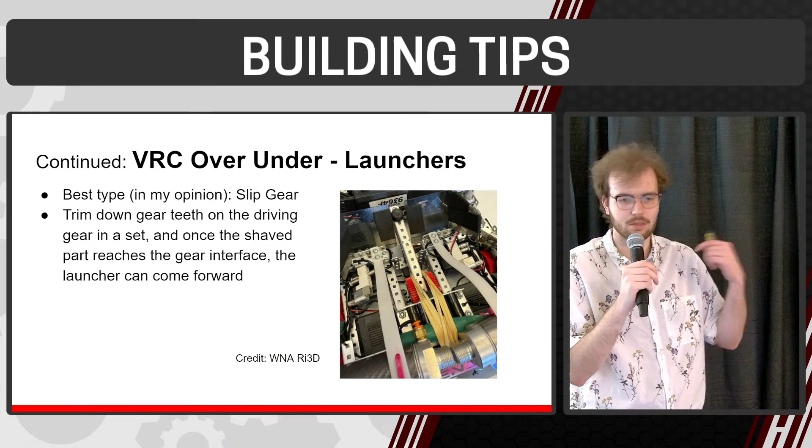Here's an innovative idea I liked from Team 229, throwing tri-balls across the field and punching close to the goal.

Let's see if we're able to play. It says unable to play. With the same launcher. This is from the 229 Ace reveal video. Let's try to pull that up on YouTube, because I wanted to share this one. Sorry about that, it's kind of interesting. There was another video that popped up, right? Yeah, but this one didn't want to work. So we don't want to see Alex's browser history, I guess. I'm just kidding, just teasing him.

Anyway, we're going to stay on this presentation, but I'll describe what they had. So they had, basically—okay, here we go, backward positioning. Over here where I'm holding this clicker, down here they had the part that the robot would intake into with a rubber band roller, and it would throw from there. Then down here, closer to my elbow where my arm's rotating, it had basically a standoff that would punch the ball. So they kind of got—oh, we got Carter on screen—okay, technical difficulties. But anyway, they're using the same mechanism for two different purposes, just with a little standoff. They had a spot where they could match load the tri-balls, and then when they match loaded them, just punch them with a little standoff when that slip gear launcher came around.

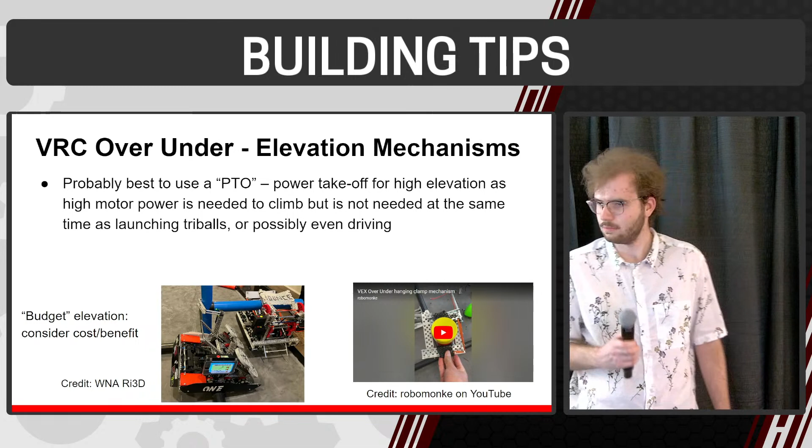A more complicated one here, we have a video of, I think. I don't know if it'll play. Yeah, so this wasn't a whole hang mechanism, but it was just kind of showing you how you could passively grab that pole. We'll leave the rest of the lift up to you, I guess. But if you put the weight where that person's hand was, and you pull down, it's going to cause the entire subassembly to twist, and it's going to bind up on that pole. Notice you can't grab onto that yellow cap.

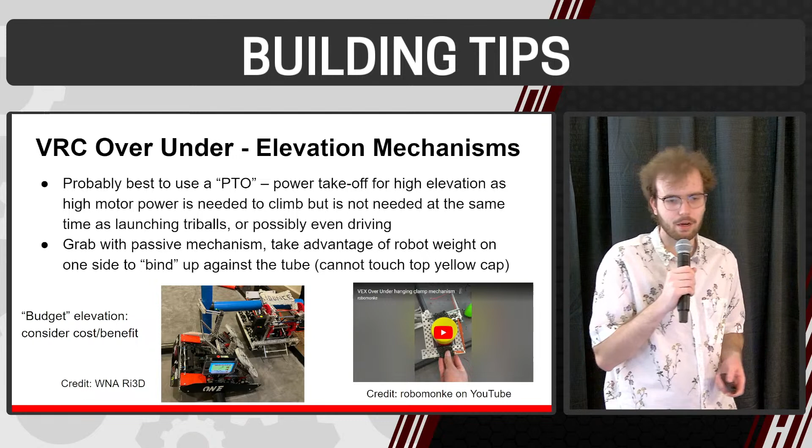And then over under other utility, this is kind of what we were talking about earlier. You need to know what other people are going to throw at you. Throw something at them, they'll throw something back at you. So you have access to pneumatics for no cost. Well, it's going to cost you, but not in terms of a motor penalty or anything like that. So maybe you want a pneumatic part that's going to throw up a blocking shield to block someone else.

That could be really effective. If you have wings that expand out to herd balls, or maybe two pistons so they can expand a different distance to maybe just grab some tri balls out, use your creativity. Power takeoff, that kind of thing. There's lots of ways to use pneumatics that I can't tell you right now because there's a lot of people out there who are going to do a lot of thinking about this. It's August right now, but just be aware, be ready for what people might throw at you, and be ready to throw it back at them.

Okay, I guess, do we have any questions online?